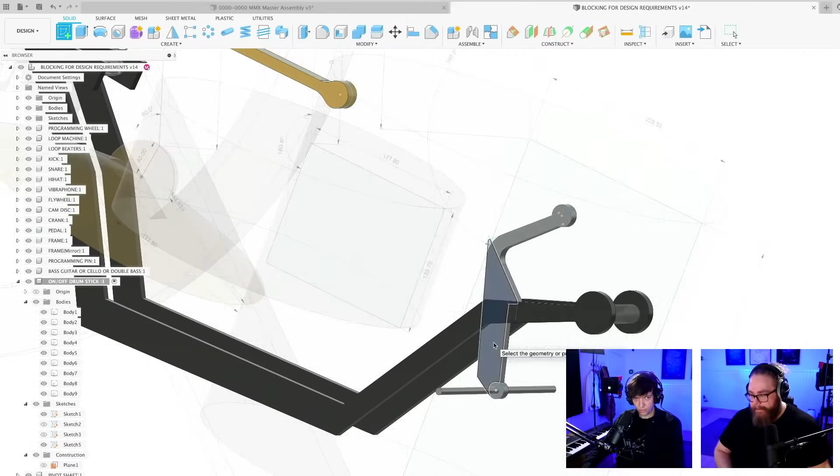Welcome everyone, straight into the fighting is ongoing here at round 3 with the Marble Machine 3.

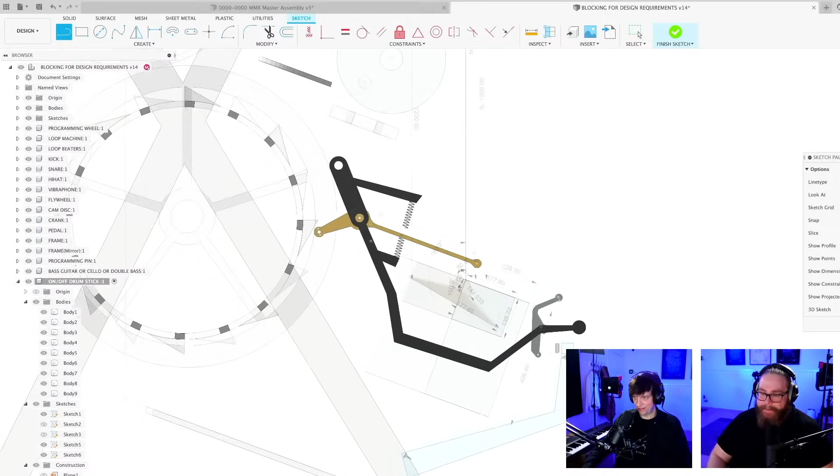Oh, this is going to be the ugliest ever. I'm just gonna connect this point here. You get what I mean. So the idea is with digital design, it's free to fail, and then we can think about stuff like, for example, changing the programming wheel entirely.

So this whole part is just now holding this spring. It's super ugly, but this is what we're all about today.

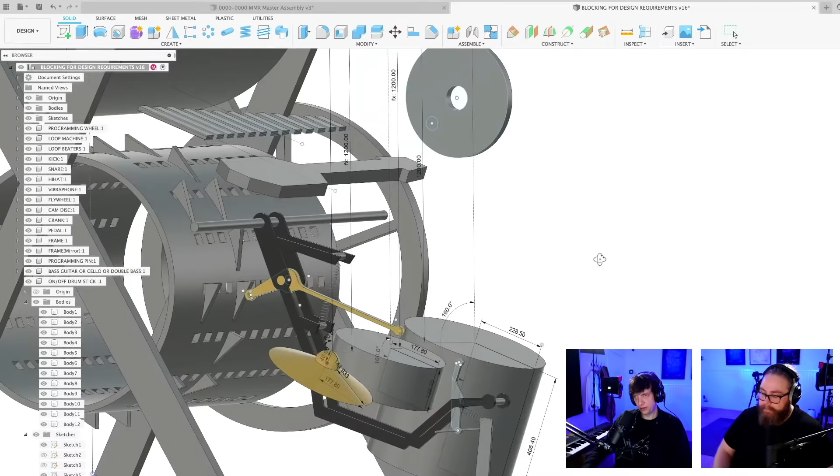So let's just put it up here. Create sketch on the middle plane.

So the cool thing with this blocking is, oh yeah, I need a spring, which then tells me, oh yeah, I need something to secure the spring to. Actually, let me change this. And it doesn't matter how ugly it is, I'm going to make it neat later.

There we go. Beautiful, there we go. Let's actually... this should be longer. Let's just do this. To the knee, to the knee.

So what do people think? Do they think a lot of people are missing the Marble Machine X? Of course, I guess. Some people wanted to see it finished, but I think a lot in the audience also understand the decision that if you're gonna sink a lot of more years to make one song kind of work on it, then there's no world tour. That machine can't come out of the studio.

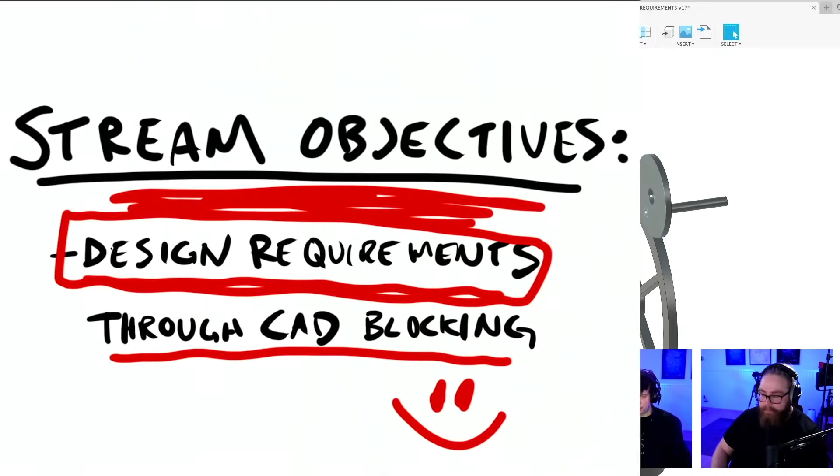So actually, if we go over to the stream objective screen, here's the stream objectives. We're still on the design requirements through CAD blocking right here. I want to make a fun thing, a list of the MMX design requirements omitted, which means this is a list where I can show you all the crazy design requirements that we had on MMX that made that project more or less impossible.

So what you just reminded me of: modular design, to be disassemblable. That sounds very, very bad. So the new machine is not modular. It's going to be in one piece. It's just going to be constructed in a room that can hold the whole machine.

Oh, sorry. I didn't mean to play that, but it was always nice with some encouraging words.

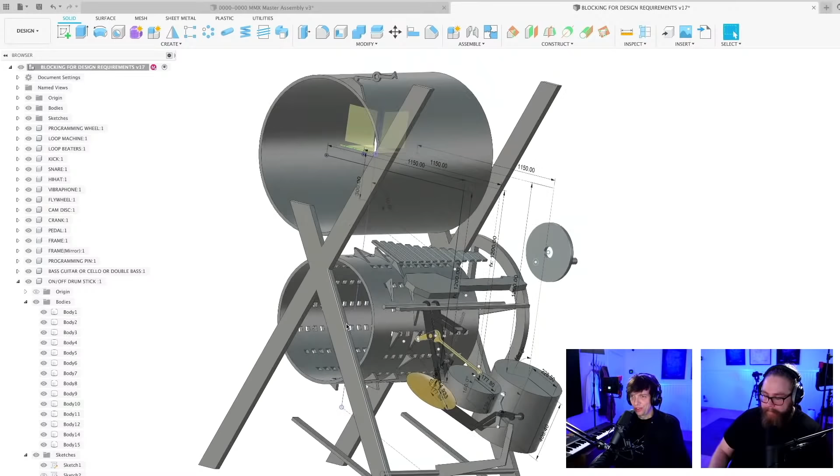So for example, this frame, it's going to be built in one big piece, so I don't have to make five sections where audio cables have to go into each other. So much simpler, things like that, crazy. And this is what Elon Musk was talking about in the last video I posted: try to make your design requirements less dumb.

I won't be able to do an airship on this machine, but I will be able to make copies. So I will send a machine to each continent of the world on the world tour, and then just go on boat and wait a little bit. So less dumb design requirements.

And here we have from Hex Lattice: I still believe, I look forward to that world tour. You see, people are with us, Martin. That's absolutely wonderful, thank you. And from Scholar Andrew: it's so good to see you again, Martin, I hope you're taking care of yourself. Thank you so much, and likewise, it's so fun to be back.

We have set up this whole operation in an effort to produce the best results we can ever produce while keeping ourselves as sharp as we can. It's crazy how much more focused I am on the process compared to before.

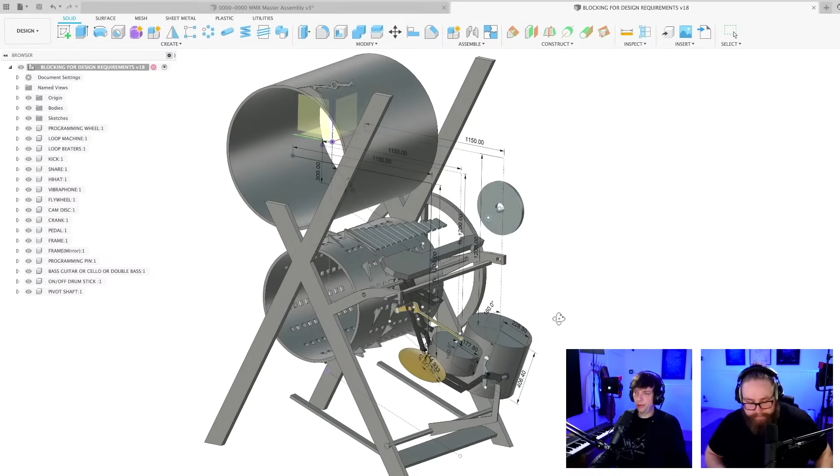So this is not going to be the main CAD model, this is just for sketching it out. Blocking, right? This is blocking, exactly. And I'm going to start everything from scratch once we have the list of stuff.

So now, if you picture this spring pulling this whole black thing up, it means that when I push this lever, I should actually hide the sketches here. So when this lever is pushed to the left, this little latch over here will release, and the whole black thing... I can't really move it nicely. That was stupid, I should have put that in its own component. It will pivot up, I can show you what I mean. It will pivot on this point like this, but it won't pull everything with it.

Maybe I actually should just, you know what, I'm gonna take away all the parts that should not move with this. I'm gonna create components from them. It's gonna be a little messy, but it's better. That's why we're here. Make a huge mess - all these things are stationary. We're actually here to fix the mess that you created. No, absolutely. Create components from bodies.

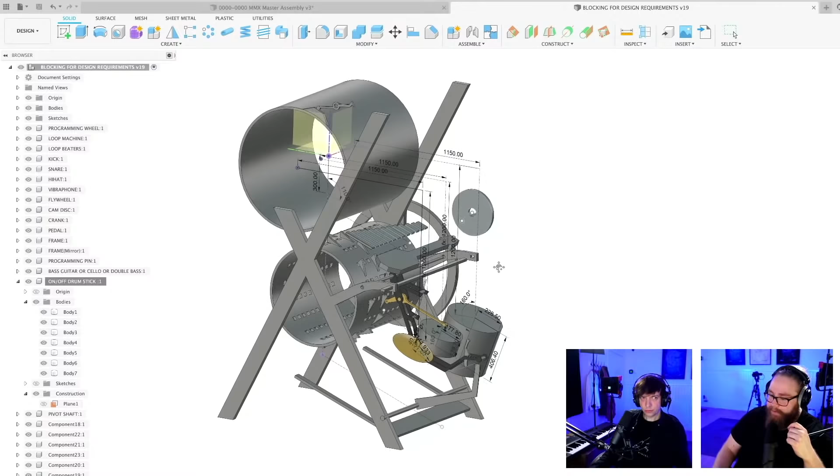Tim Schafer wondered - the comment just went straight away from me. Oh no, you'll find it. If you just give me - would you consider reusing designs that worked from MMX because it's a known good solution? I would be afraid to change the whole design and realize that it would not work in real life. So that's a very, very good point, and it's something that I've learned a lot from.

If you once have prototyped something and it actually works, that's kind of super valuable information.

I agree fully with your idea to reuse things that have proved to work, for example the gear ratio from the crank to the programming wheel, 1 to 64, all those things. But I don't want it to be a continuous tricky balance to find between reusing stuff that worked versus having a clean slate to be completely free in the new design process. But we should definitely think about it.

Just a quick one here from Bamahut: Welcome back, Martin. I was worried you gave up after your last video a few months ago. Good to see you back at work with more focus.

Oh yes, it's good if we give that impression today that we have more focus. That's exactly what we want to do. Woo! Let's go. What should we add now?

So we've been in a discussion about the bass guitar. Oh, we have the cello image. No, do you have it? Not yet, you can look for it.

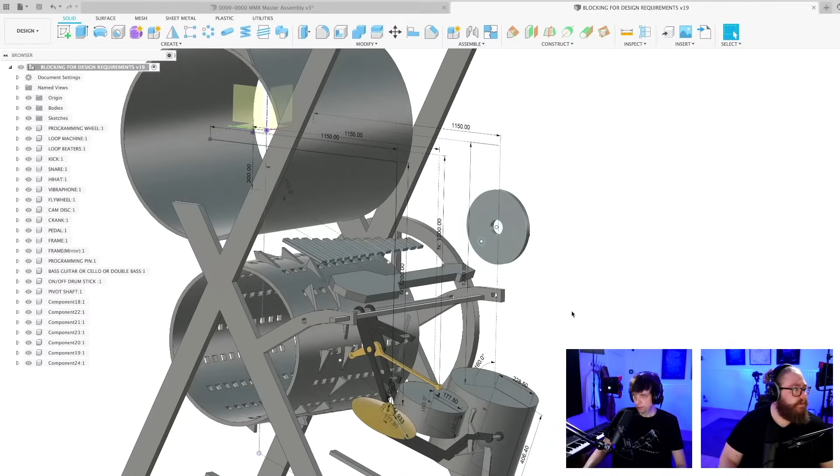So, marble drops. The thing I know for sure is going to be marble played is the vibraphone. Let's just move these a little bit outside.

Wait, on this sketch I can show dimension. I don't have to go into the sketch, I can just go into this value here. Let's do 130, and the vibraphone goes out a little bit.

So I've been promising to give up on my darlings. Another design requirement that I will omit: that made everything... instruments have to move when being hit, like the fact that we wanted all the instruments to pivot, like in the animated Animusic Pipe Dreams video. Another design requirement that is wonderful, but that made everything...

Oh, I didn't want to play it again. Sorry.

So I think I'm gonna keep the instrument still and just make it so much easier, so these drums are not moving around. Instead, the mechanical machine doesn't have to hit a moving target. I'm crying inside admitting it to myself, and I'm also laughing because I know this trade-off is going to help so much in the end.

So, Rosero's 3D printed prototype of the clock escapement wheel. Oh, can we show that one, Hannes? From YouTube? He got it completely right.

So I'm just going to do exactly what Rosero did. I actually have in my studio a sign that says 'What would Rosero do?' It's right in front of me. We don't have the camera angle, we'll have to get one for that later. But he got it completely right.

So for marble gates, I'm just going to do exactly what Rosero did, put a marble gate in here. I actually did a redesign of Rosero's gate, and I suffered for it. He prototyped it, like the comment said before, so you know when something is working. We knew the Rosero gate was working perfectly, and still I iterated on top of it, and my iterations inserted a lot of issues. So I'm not gonna do that, I'm just gonna do exactly what Rosero did.

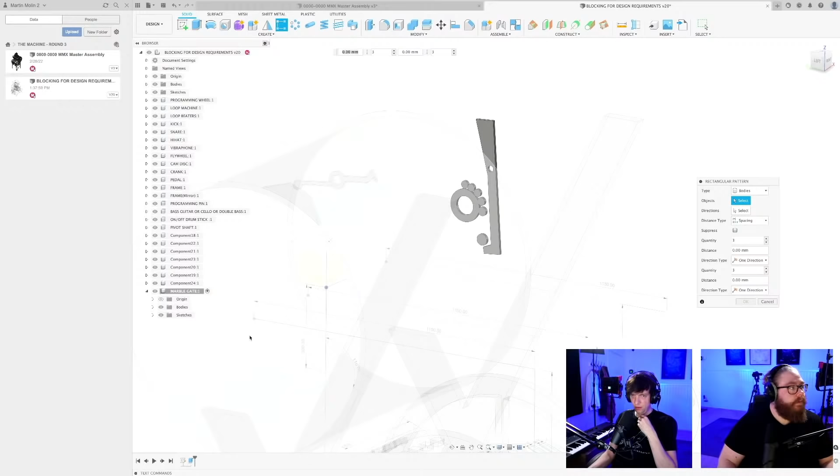So let's just do a rectangular pattern. I've been complaining about rectangular patterns in Fusion, but that's on the sketch side, so in sketches I try to avoid them whenever possible. But out here, when you're not in sketch mode, I'm not scared of using a rectangular pattern, and I'm gonna make the pattern on the bodies. Let's see what's there. Like this, we have 4 bodies here. Oh yeah, never mind.

Along the x-axis, and I hope I can have more channels, so that's something we're going to find out here. Maybe I can have 20 vibraphone notes or something. Say they are 10 apart. No, of course not. 50. Symmetric. Let's just do this for now. Boom.

As I mentioned in the last stream, I'm going to change the diameter of the marbles, the balls, to be much larger so they're more visible, and change material to hard rubber or wood, which makes a better sound on the vibraphone. So design requirements: we have marble gates, wooden or hard rubber balls for vibraphone sound, but they need to be heavy.

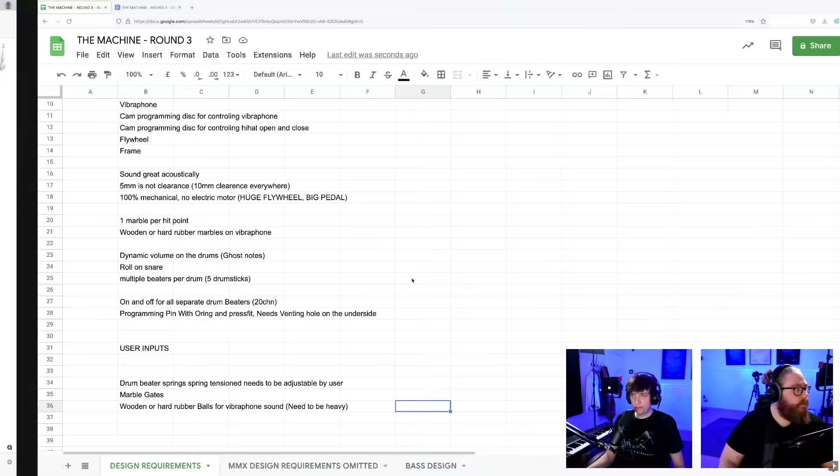Oh yeah, we need a marble lifting system. Things like that, marble lifting. I think that's where I went very wrong with the previous design. On the Marble Machine X here, I had a million ways to lift the marbles. If you see to the left, you can see the original lift. I had only one lift on the first machine, and that's kind of what I want to do on the Marble Machine X. No playing around with lifting the marbles, just lift them. Like 100% engineering, easiest solution possible. I don't know how yet.

I was also thinking that maybe we don't need a funnel for every... oh, we need a funnel. So we need a funnel system. But I'm thinking maybe we can just have one big funnel for all the marbles. Something like that.

Now when I look at this, I'm thinking maybe the drums should be moved inwards. We had a nice comment earlier about putting the drums on the side. So if the drums are completely underneath, maybe I should just put a vibraphone outwards. Let's try that. So that's on this one.

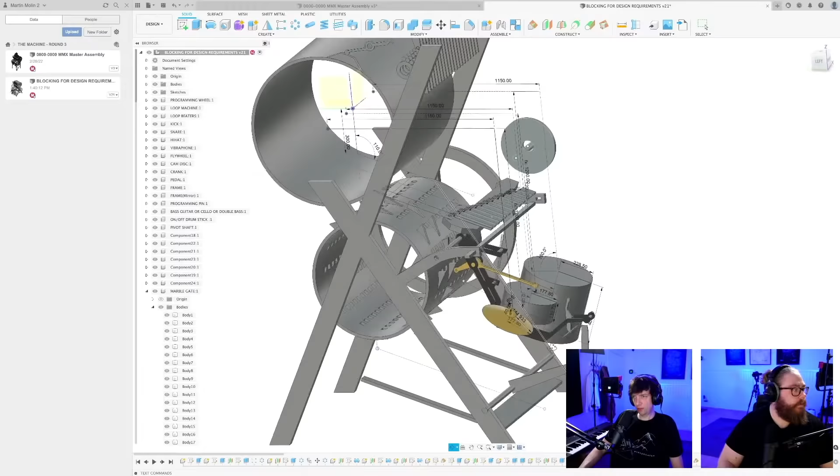Oh, that looks better. Maybe the marbles can jump from the vibraphone over all the drums and then be caught somewhere. Maybe the marbles from the drums as well can...

I put the vibraphone here. I have to plan for the resonator pipes. So let's add them to the list. Resonators.

Yep, so this is the clock escapement gate, prototyped by Rosero, with inspiration from Gonzonator. Yeah, just show the first clip again. This is just what we're going to do, and I broke the escapement thing because I thought it would look cooler. So talking about my last video was another thing like that, but that's just what we're gonna do, and they are represented up here on the screen. So yeah, that is going to be awesome. Woo! Thank you. Thanks, Jamie.

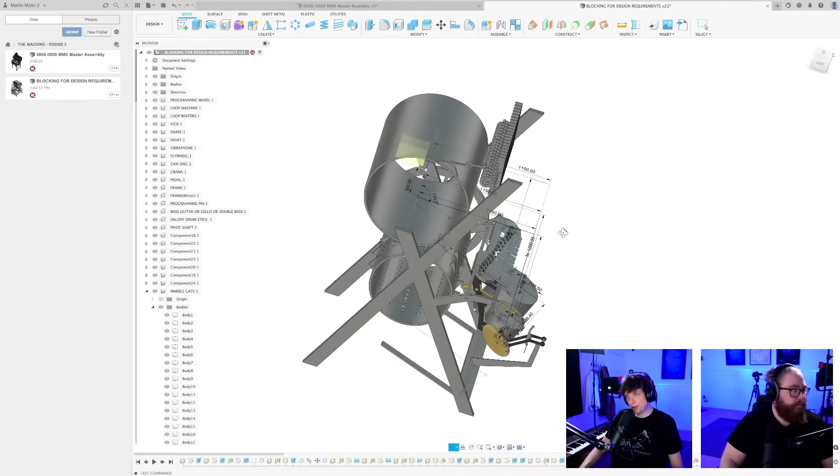So there is this square system where you have known knowns, known unknowns, unknown knowns, and unknown unknowns. And the known unknown is the whole bass placement. I can't really get it in. This is something that I need to think of pretty fast.

What if... maybe just on top? Maybe that would look cool. So if I just move the bass on top. Oh, wrong sketch. This sketch, please. 200. Is that working? Yeah, that is working.

Maybe the vibraphone is too close to the drums. That's also bad sound-wise. Acoustically, it would be better to put the vibraphone as far away from the drums as possible. Yeah.

I love the idea that the drums are a little bit in the bottom of the machine. That feels great, like natural: drums, bass, vibraphone. But if I'm going to play the bass with my hand, it can't be in the way for the marbles that are falling. Maybe I should just skip having a bass.

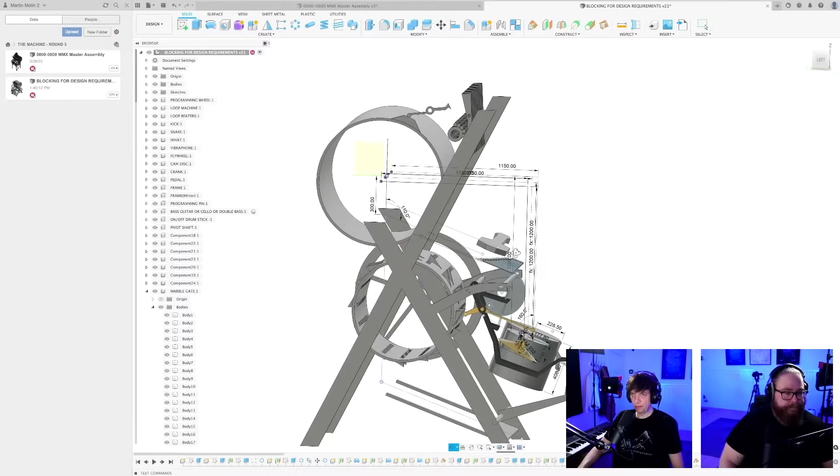No, what are you talking about, sir? You want some bass, sir? Yes. I think me too.

I'm gonna move it back a little bit. I think I have a transparent cello for you now, at least. Awesome. I'm just going to fix this, and then I'm going to try to add a cello into this design. I'm just gonna see if I can constrain this. 700. Ooh.

Okay, so I'm going to go to the screen. Where is the... in our stream folder, you'll find a new folder for you right there. Let's see, insert... Let me know if I need to get over there, because I can switch to this camera, you know? Oh, that's nice. I will come and find it with you. That's nice.

Insert. So here. Yes, here. Here. Ooh, nice. Face, I'll put it here then. Lovely, there we go. Let's see if something magic happens. It has—check this out.

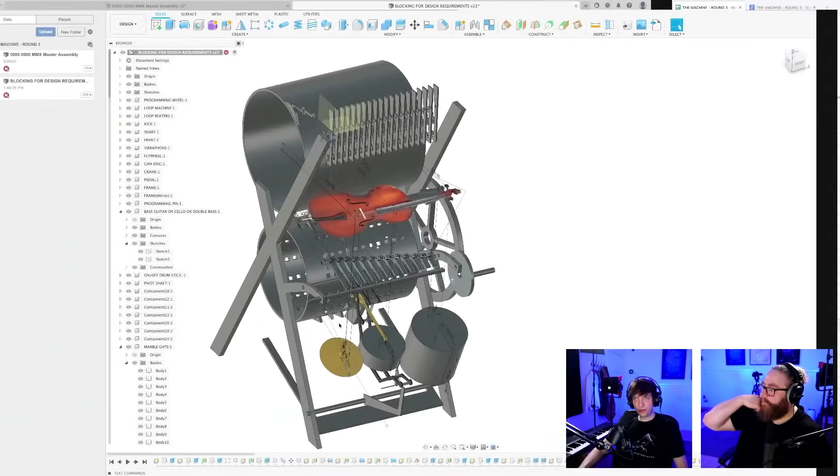And a lot of people are asking if you ever considered a hurdy-gurdy. Well, we had the idea with a solo instrument—I'm gonna put that here in the design requirements, solo instrument. We had it on the phone. I had a hurdy-gurdy version where a spinning disc was vibrating the string, but I gave that up.

This looks fantastic. So, okay yeah, this bass is going to be a headache. Let's, for fun, duplicate these beaters here, because we're gonna have them in many places. Yeah, I vote for fun. Let's go there.

So this, and all of these. Let's make a rectangular pattern of those. Chaos is ensuing quickly here. So let's say I want like 4 for each drum, so 12. I should have actually grouped them, but never mind. 200 and symmetric. 100, here we go.

Are you feeling it? I'm so feeling it. The wheels are too small, though. That's the wheels turning in your head, at least. Yes, they are, they are. Okay.

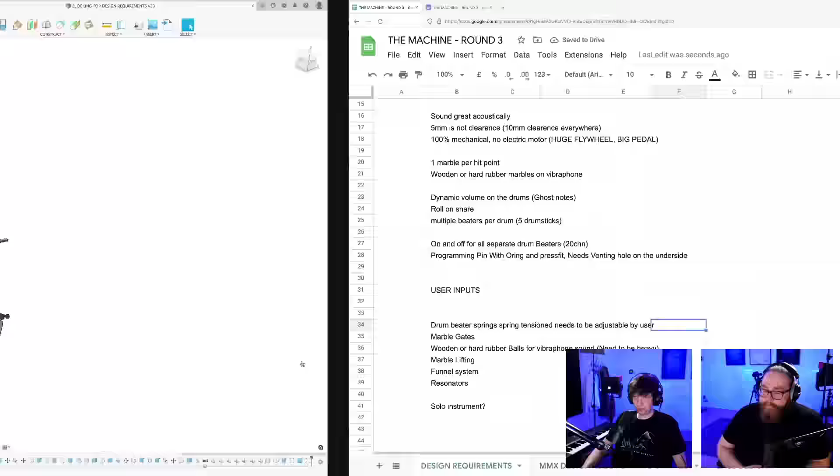Pascal asks: why not use drumsticks to hit the bass strings instead of marbles? That's a good point, I've been thinking. What activates the bass strings? Like plectrums, beaters, marbles, pull-on, hammer-on... Rhymobile, Jan Cardell style—Jan Cardell, my favorite Swedish artist, built a bass guitar where electromagnets just pulled down on the string, and then you get the note pitch and the activation of the string at the same time. Then you don't even need a beater to activate the string.

So yeah, this is so—my idea with the current placement of the cello/bass is that I can sneak my left arm in here, under where the marbles are dropping. So let's actually—what if you move the vibraphone over the bass? Yeah, that was what we had first. Oh, bass directly under the vibraphone. But there's going to be the resonator pipes.

So maybe in 3 levels. Why did you want me to move the vibraphone? If it was with hammers on the bass, then if you move the vibraphone up, you won't have the nuisance of keeping away from the marble drops on the vibraphone when you stick your hand in. No obstruction of marble waterfalls. Exactly.

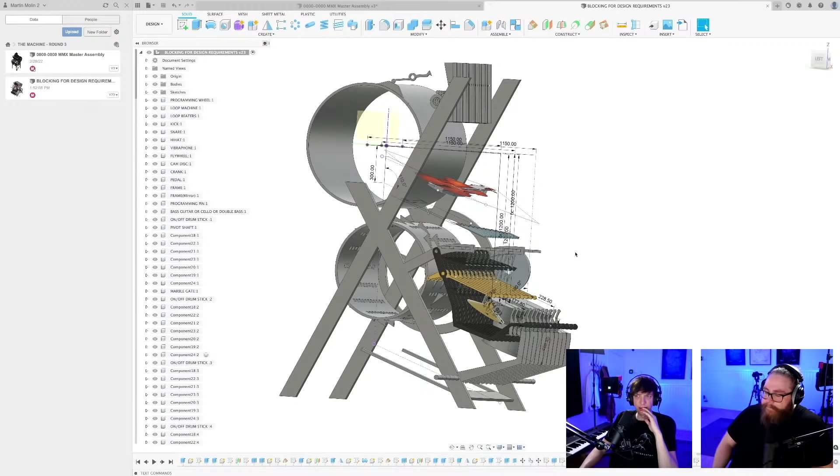Because it does feel a little bit like drums in the bass and then melody on top, right? Yeah, there's something there, but then we don't have a long fall distance for the marbles. But why do we care about that? We don't care about that. Then it's easier to film the letting go and the hit, and maybe the hits are even more precise. But if we're also going to play the drums with marbles, we have a longer time... because up here doesn't make sense.

Should we go back to that then? So because all of these don't have to be here, I could actually—okay, let's try that. Let's put the vibraphone super high, and let's move the bass down to the second level on this sketch. 500 maybe. And let's just push it forward, because here is forward. 100, 1010.

This kind of makes sense, Hannes. I have some logical upgrades as well, not only my physical body now. It was fun having you in the iPad though. Yeah, South Park style—but being on the iPad, you can't do stuff like this, you know?

If I go here and go to this one, I can actually reach out to you and do a cheers over here so that we hydrate. Commando Central. And for those wondering about my chair here—this is an original Martin Molin fixer-upper. He fixed it for me with an audio cable. Who would have known?

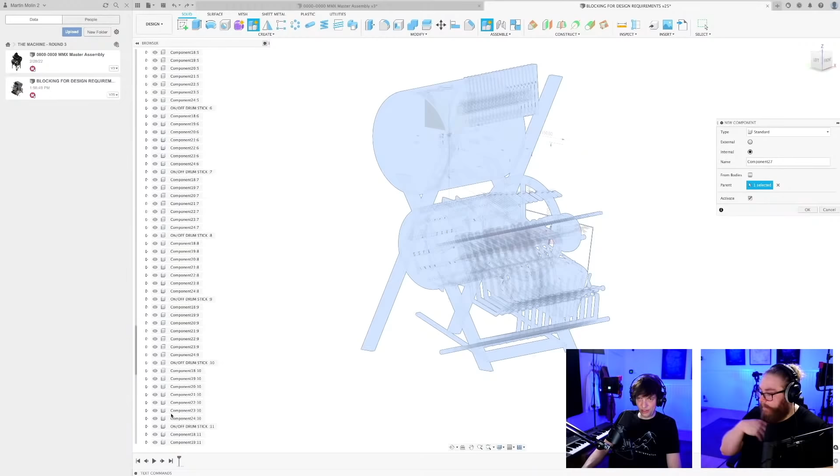Oh, my browser tree has gotten too big. Okay. So let's just draw it on the middle plane. Dropping like this. Oh, I should just make one line and then I can turn that into a pipe. People will like that.

We are going to simulate all this with real physics simulations using the Algoryx software, on the computer that Linus Tech helped build. Since a lot of people in the chat are wondering where that computer is, it will be part of the process further down the road when simulation starts to happen. It's actually right here, acting as a keyboard stand right now. We already have it in-house.

So let's say this is a marble pipe, and I can create a marble path. And the marbles are... 440, like this, boom. Let's just make it red.

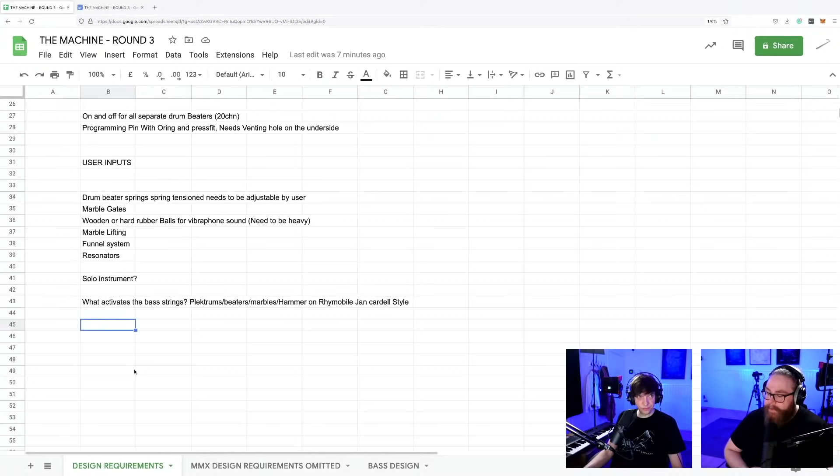If we want the drums to be marble played, that's a big question. Do I already have it down here? Are drums marble played or not? It's going to be much simpler if not, and much more fun if yes. So if I introduce the marble path for the drums too, things are going to get trickier very fast.

Sketch. So then we will see that my window, here comes the marbles that play the drums. So the idea now is for me to discover issues digitally.

Just use the digital angle grinder this time around. Exactly, it's free to fail. Or less expensive to fail.

New body. So there we go. Now you can see that my window is much less, right? Yeah.

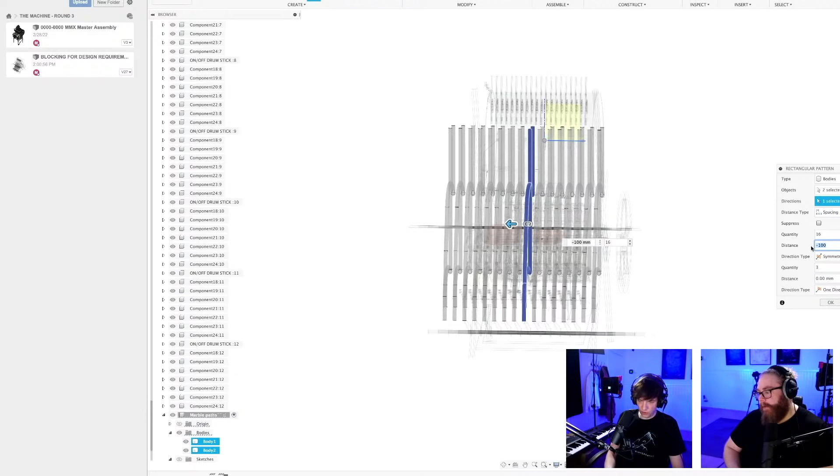So let's just do some more of these. Select rectangular pattern. Say we have 100 millimeters, and we do... 24. Symmetrical. We do 16. We do minus 100.

There we go. Can we get a save file right now? Oh, people are so nice. Look at this, woo! This is what you're going to get if you shoot with long exposure and capture all the marbles - you'll be able to produce this image eventually. I saved, by the way.

So now I have to put my arm in like here. Now we have to move the bass, really move the bass in and under, so my arm action is completely out of the way for all the marbles. We can do that, there's place for that.

Here, 1000, there somewhere. But now we still do not have the resonator pipes from the vibraphone. You know, like on Mad Max Hot Rods, where they put the exhaust pipes up from the engine. I've been thinking of doing a Mad Max Hot Rod resonator pipe for the vibraphone. Yes, please - and that would kind of... no, it won't work either. We're bumping up against some major space issues very fast here.

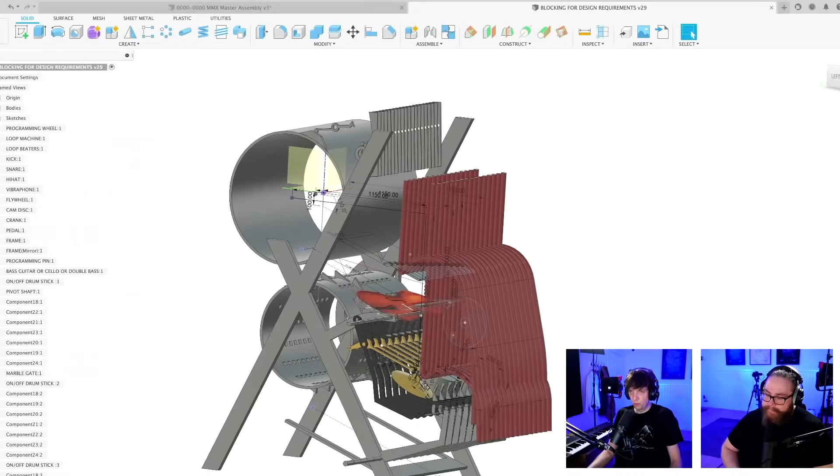In the case of the drums, it's going to be really tricky because all these beaters need to be there, all these mechanics. So for the drums, I think not. And in the end, in the Marble Machine Maker Kit project, we opted out of having them bounce backwards, because it's just a waterfall thing that the marble is bouncing forwards - there's something with that. But if it was possible - so I think on the drums it's not possible, and on the vibraphone...

And here we have something also: SARQF says move drums to the back of the machine, that will open up a lot of space. Yes, we had a similar suggestion earlier, and totally agree. It's a shame, and/or under.

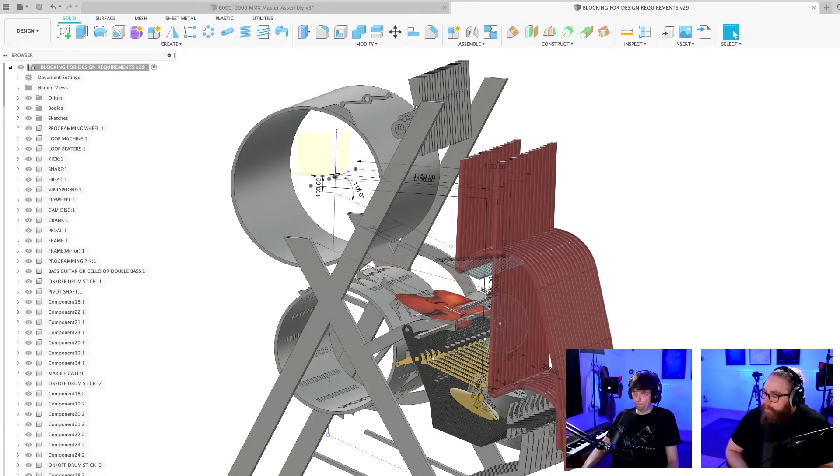Or Amurpus MM suggests: drums sideways, vibraphone inward. Sideways - I guess if we don't want everything crammed right in the front. Sideways is also an alternative, actually. Everything is on marble bouncing backwards.

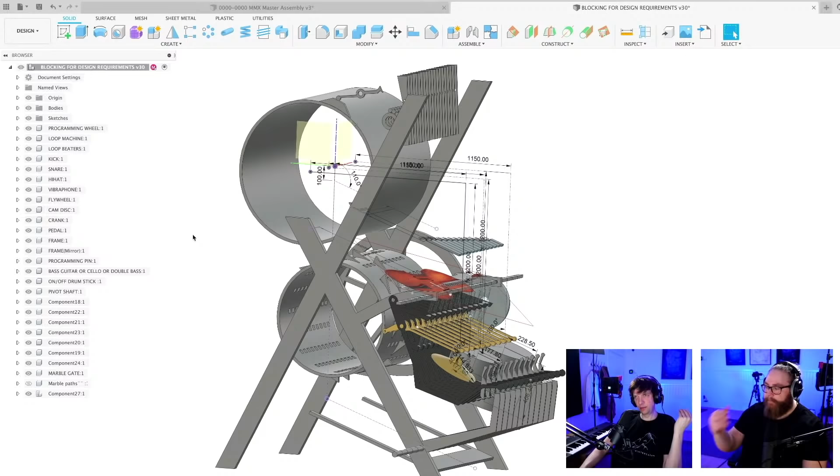If the vibraphone... Alan Barker, have you considered using this space inside the programming drums, perhaps for the bass drum? No, but I have considered that one of the best marble lifting techniques is actually inside the programming drum.

So now that you pointed it out, I'm just going to note that here: marble lifting. Fix the screen - I have to click two buttons, it's way too hard. Marble lifting, inside prog wheel, conveyor belt, question mark, gunk. Inside the programming wheel makes it very difficult because as soon as you have spokes and stuff, you need to hang stuff in there, since the wheel is spinning.

I don't think it's needed, it's just a thing to solve this. Let's add the resonator pipes to the vibraphone, perhaps.

If we put them here, they can go under, in between the two programming wheels. I think the lower programming wheel should sit much lower - the loop machine, let's see. I don't think my model is very parametric. I'm going to move this further down.

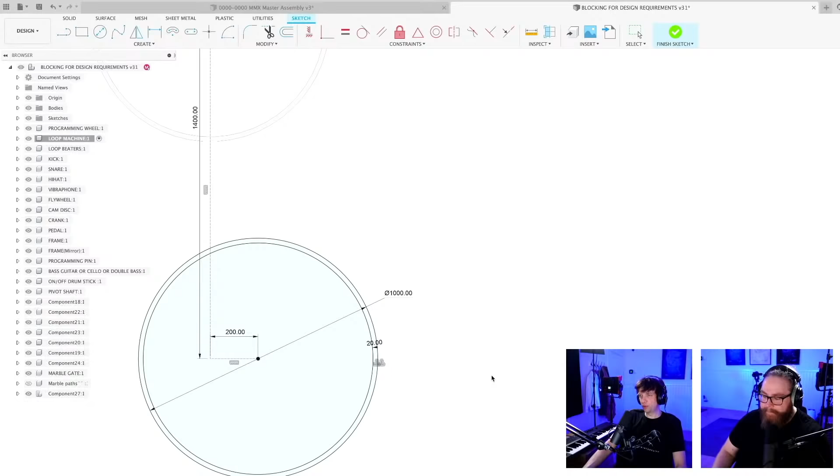Function over form is an even more aggressive approach. Oh, everything followed - look at that, this looks much better already. And the flywheel should follow, and then I'm going to make my blocking a little bit more parametric.

How do I do that? In this sketch, I'm going to project a point from here, and then I'm going to make this flywheel concentric with that circle. Boom - which means that when I move the lower drum, the flywheel component will move with it.

So form follows function, yes. I've created a huge space here for some resonator pipes - you can see how much air there is here. We can even fly through it. Woo! Like this.

So we could have the vibraphone pipe coming out through the two programming wheels. How does that feel? Hannes, 3000 - that feel, yeah.

And we have here a comment - if you could have the drumsticks under the drums, that also gives us more space.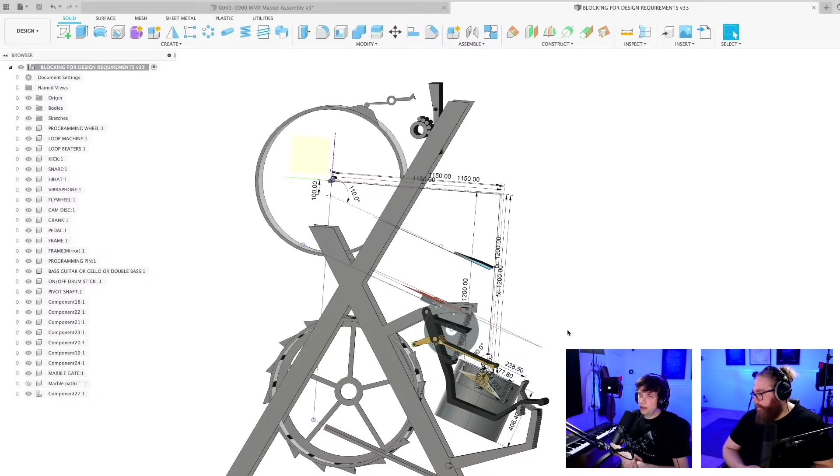I'm a little bit stuck right now on this big decision about the bass guitar. I can make it easier, but if I'm going to use like a cello or a double bass, let's see if I can make it bigger. I would need to either learn how to play in pitch, because these have no frets, or I would need the machine to play the notes for me - so I would need to program the notes. That's a huge design requirement discussion.

Here we go, oh yeah, there. I think we had it already - manual played, or... Okay, I'm not going to give up, I'm going to keep on juggling these positions.

So I think in a way, let's add the resonator pipes to the vibraphone. And let's see, where's the vibraphone? There. Let's push it back a little bit.

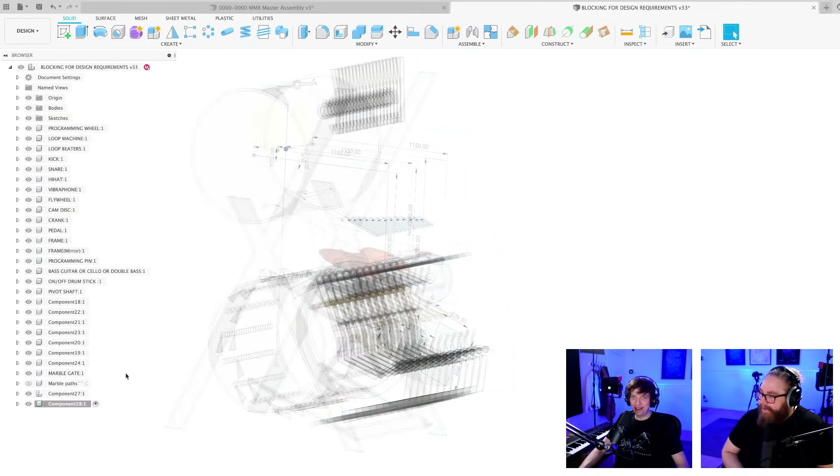Absolutely, which is the perfect cue to let me design the funnel. I'm going to make it the actual size that I'm going to have it, something like this. Wait for it... I did that wrong here. If this is the machine, redefine sketch plane to this.

Like for a musical noob like myself, what is the big difference of having a cello or a double bass? The double bass is just so huge. It's huge, yeah, but that would be a problem, right? Yeah, but it also goes lower down in the register. Which is, I think, a big pro.

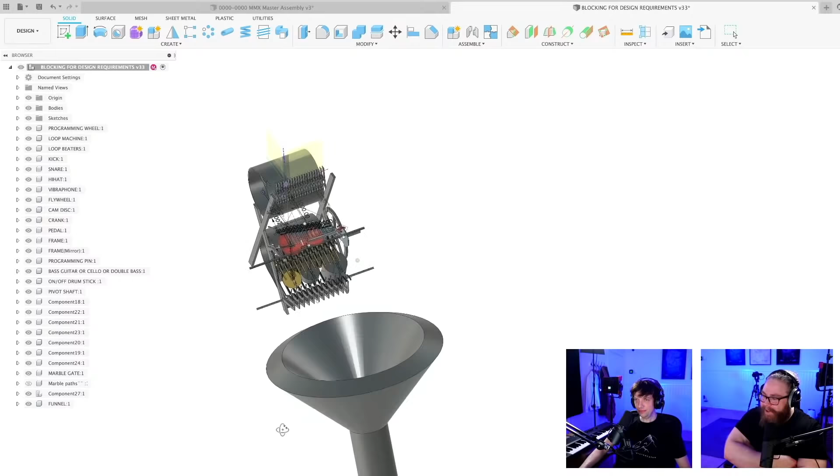So if we just revolve this, this is the actual size of the marble funnel. There we go, the machine should be inside a big funnel, no marbles escaping this time. I've done it with marbles on the floor before. This is making it simpler. So the funnel is actually going to be below the stage. If we just put the stage here, hopefully no marbles will escape, right? Yeah, this should work. I think this is going to be the plan for the funnel.

Chris Lafferty says cellos with frets are 100% a thing. By the way, double bass only goes a fifth lower than cello, and cello can go much higher than a fifth above the double bass. This is wonderful information.

I searched for it. So the cello goes really... can you please fix the screen? Cellos with frets, can you pull that up? Cellos with frets? Only a fifth less low. I love a pizzicato cello, it would be so incredibly cool. I've never seen a cello with frets.

I'm going to make some resonator pipes meanwhile.

Let's do it on this sketch.

Cello with frets is called a bass, that's how I spontaneously would have thought about it. It's maybe like a bass that tries to look like a cello, which of course is cool in its own way.

If you want to look at it, I have some images here, there's stuff available. You can see here you've got some electrical variant of it. I wonder if there's actually frets or just inlays, so it's actually fretless, just visual markings, or if it's actually metal. Something to have nightmares about, or to explore. It was cool.

So I'm just adding this. I'm doing again a little rectangular pattern just to get a feeling of how cramped everything is.

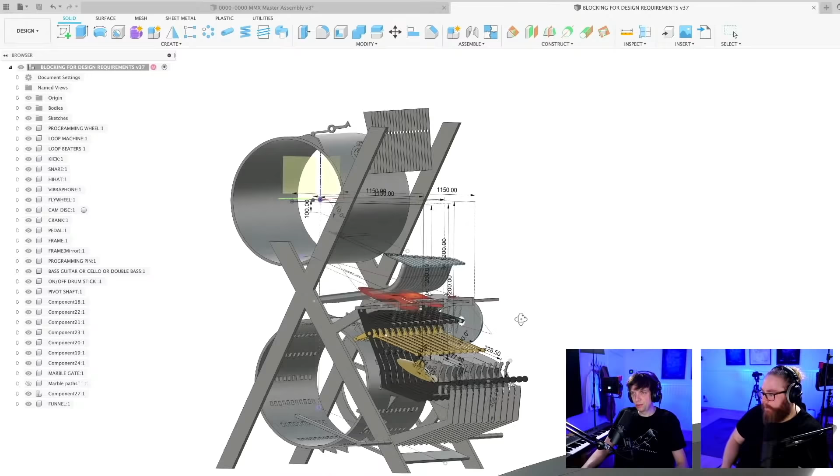So thanks for the knowledge. We can always go back to regular bass. I mean, it sounded great on the MMX, right? Yeah, and if we're gonna do the design principle that it has to sound good acoustically, we have to go crazy, we have to go double bass. Oh yeah, if it needs to sound good in the room, yeah, with no amps. But of course it's going to be super tricky.

The only thing I'm really happy about now is actually the funnel. I think... there we have it, the future is here everyone. 100% engineering, okay? This is awesome.

So maybe should we have a cymbal? Should we have a cymbal? Oh, that's a design requirement if I ever heard one. I mean, a little cymbal. Yeah, we already ran out of space and I'm adding more features. It's feature creep already, you need to add the features to then destroy them. Maybe we should have this sideways. This is the time for dreaming, and then we can chop away all the unnecessary stuff. Well said, well said, there we go.

Cymbal, I'm gonna add a cymbal. I have no place, I run out of space so fast. Is there some way you can hide it, semi inside the machine, like with the first machine, even with Marble Machine X, right? You mean like on the side? Yeah, somewhere, get it inside somewhere, hide it.

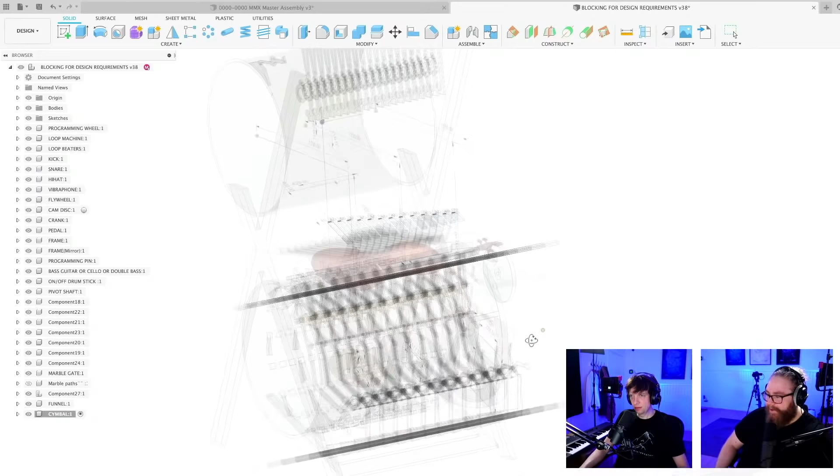Yeah, should be totally possible somehow. Let's just add it and then we can... no, by the way, let's do an offset plane. Oh, never mind, let's do it from there.

Here we go, Christopher Marty. Funnel size seems correct. You'll have the cleanest floor ever with that. Clean Floor Gang is back, right?

Oh, so horrible. It was horrible, everyone. I tried to not be downhearted in the videos. It was horrible, such a distinct sound, and we've heard it for years. Even with the first machine, you could wake up in the middle of the night hearing those marbles falling on the floor. Disheartening, it was so horrible.

Oh, Canal Frump. Place a possible Martin-sized figure in the drawing to plan out ergonomics, arm reach and such. Good idea. Yes, very good idea.

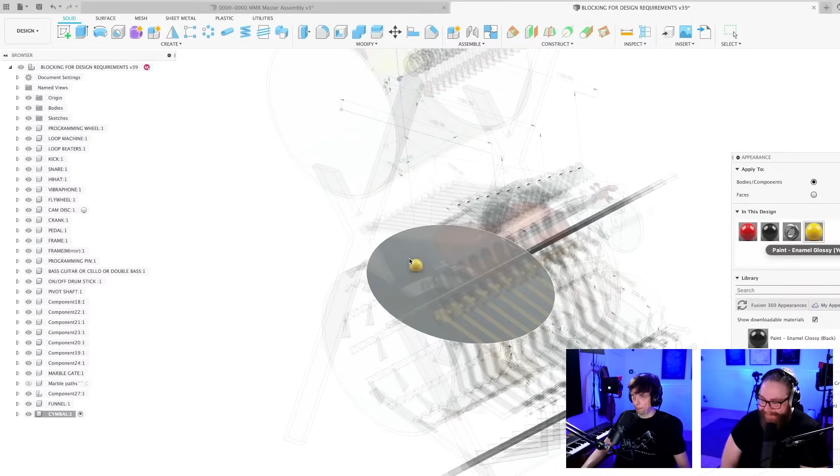Big one. So I'm gonna draw myself. I know my length.

Maybe you have to get the measuring stick and measure my arms, Martin. Do you want me to do that? I can go fetch it. Yeah, why not? I'll be right back.

I will switch you to only you then. Oh wow, so cool. Be right back then. Fantastic.

So we're gonna do here, let's isolate myself. I am 187 high, so let's constrain my own height to 1870 millimeters. And then I want to see the frame, so we're standing on the same floor. Here's the frame, I'm going to project the bottom of the frame and make my feet collinear with the frame.

So here's my legs, maybe the legs are like 1 meter. Legs are 1 meter, and head is tangential to the top here, so head is perfect. Head, I think, should be 30 centimeters.

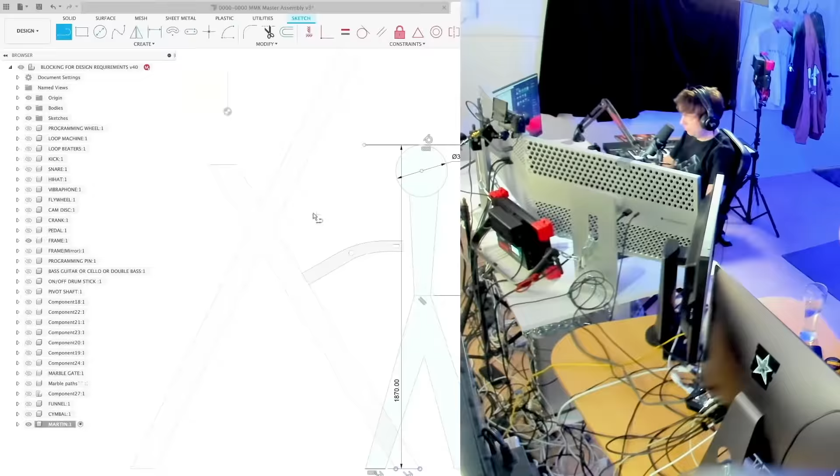So... 940. Are we done with this? Can you measure my leg? I can measure your leg. People definitely need to see this.

I don't know how, this was probably not what I meant. 940, yeah, with the shoes, oh yeah. So I can actually add like 3 centimeters, I'm gonna put 190 then. 108? Yeah, wow, I guessed one, so I was close. 180 for the legs, 940 for the arms.

Now let's measure your confidence, Martin. Oh no, it doesn't reach that far. Look at that dish. It's too big for the yardstick.

Gonna mirror the arms, and I'm gonna mirror this line. Okay, we have Martin in the house. It was a very good idea actually to get a little scale reference.

Unisolate all, there I am. I fit into the funnel, I'm very happy for that. We're gonna move me a little bit closer to the machine. And I have the sketch on a plane, so I can just drag this when I want to stand closer to the machine.

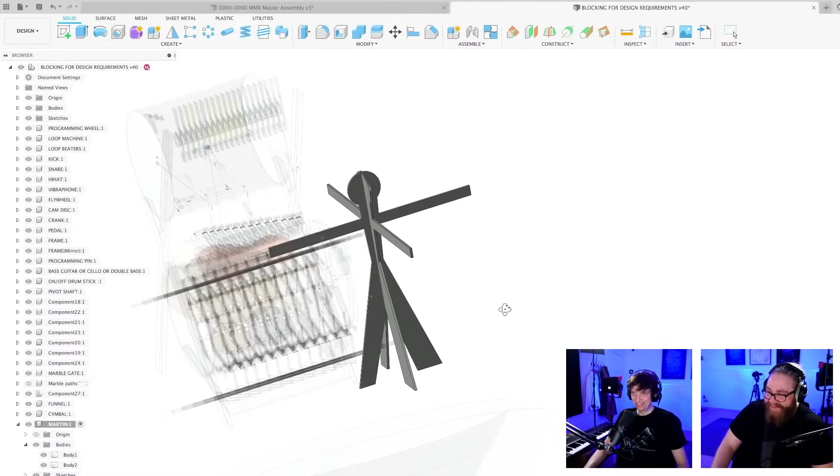Whoa, that looks exactly like you. So you can actually see that. Yeah, this was a wonderful idea from chat. Thank you.

We should make me another color. I'm probably red. So...

Another idea is to just skip the marbles, just have everything played by beaters. One idea is just to skip the marble machine entirely. Yeah, but that's actually the idea for this project.

If we go over to the plan, right, and then you need to fix it. There we go. So just repeating what we said in the first stream, what we're doing here is finishing the digital CAD model. If this CAD is promising, we will manufacture a physical machine. If it's not promising, we're gonna give up on this idea finally.

So we're actually going to figure out how to give up with good conscience. I can't do that yet because I feel I understand so much more now. Yeah.

Scale feels nice. Yeah, I'm stuck on the... I kind of, but maybe the base is cool there. Maybe there's no issues, maybe just lower the base. I'm just gonna keep on moving it around a little bit.

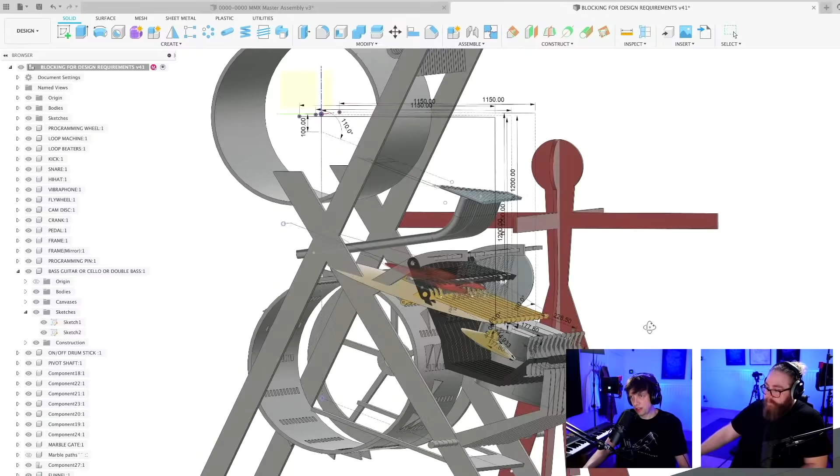I should very soon move all these mechanics away so we can actually see that we have that space for the bass guitar. So now it was great. Now I don't want to play in shoulder height.

I want to play a little bit under my shoulder height, which means this position makes more sense. Can we move it further? Something like this. How cool.

Imagine I'm gonna change the camera to perspective. Look how cool when you film this and you're like bass and drums next to each other, right?

And I don't have to reach down to the left side of the bass. I only have to play up here. So I don't have to reach all the way, as long as there's no scary flywheels in the way for my fingers.

Should move it up a little bit. It's annoying that I can't see. I'm gonna show dimension. There we go. 600. Well, this is the best so far.

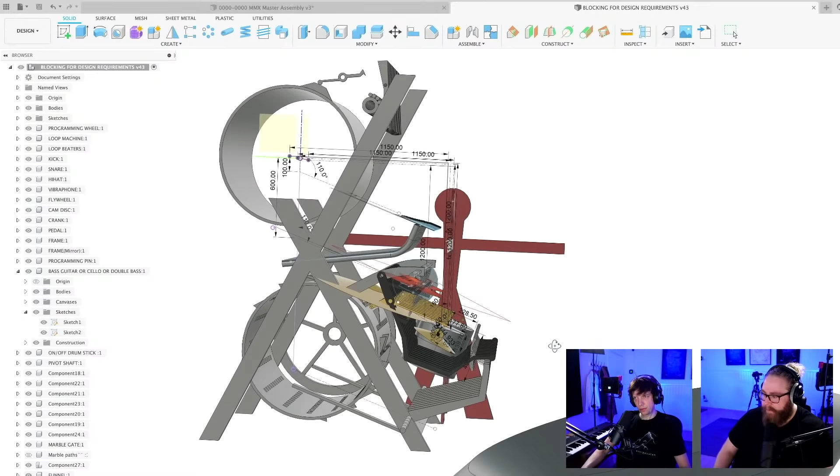Okay, so let's talk about the funnels for real. Finally. So I'm gonna make an ugly funnel.

So I'm thinking about these on and off things. Imagine how good it would be if they sticked out. Oh, I have my left hand, right? Yeah, you do. So all these on and off things, they should maybe just move up.

They should move up here, maybe. Oh yeah, so we could move them, then move everything down. Yeah, because they go out of... Because, okay, I'm going to first draw the funnel.

I'm going to save this funnel. I'm going to call it Funnel alternative 1. It is a nice solution if everything else doesn't work out - the floor funnel.

So let's make a new funnel, alternative 2. I can't even be bothered with correct spelling. Let's do this.

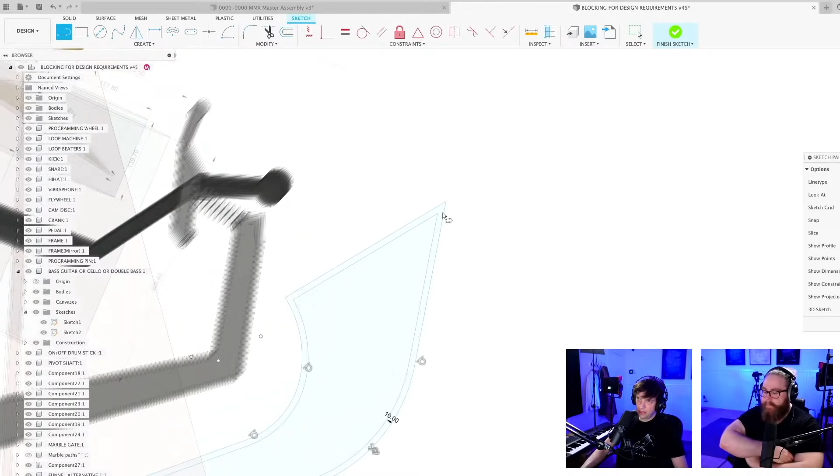No, that's not what I wanted to do. Offset. Like, I'm not going to be aesthetically impressed with this. But everyone will see the practicality.

Yeah, now is not the time for aesthetics. Exactly, art will be automatic. So imagine just having something like this.

And you can even have - I actually have an idea, it has to be silent - you can even hang fabric. I had this idea actually, imagine just rods and fabric. Let's go here: silent mega funnel with fabrics.

Something see-through-y. Yes, good point, I'm gonna add that. I'm on aesthetics, I should keep my mouth shut about that.

Yeah, but like a net, like a mosquito net. Yeah, mosquito net. Mosquito net. And where we have all our mosquitos. Mosquito.

Paul Elnan is wondering here, combining marbles and beaters, how to overcome timing issues in different tempos. It may be wise to have the same operation, same lag on all instruments. Perfect point, absolutely perfect point.

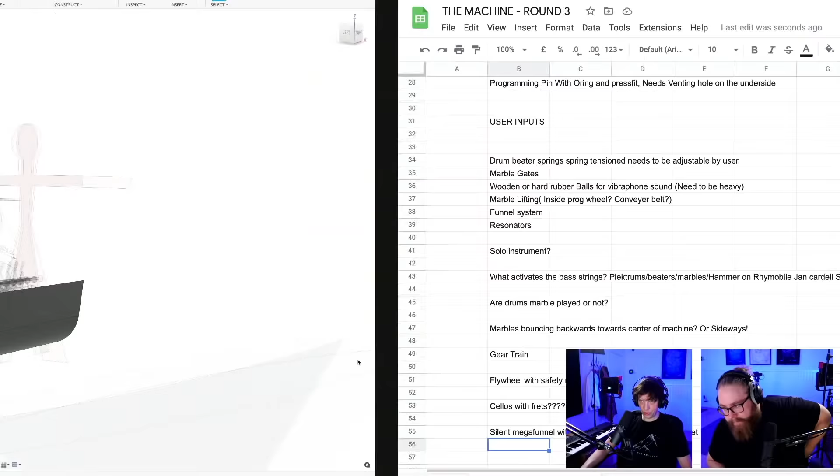Loop machine drums need to be, like we did with the brass thing, adjustable like with the - what's it called - the clutch thingy. That was the correct term, in brass.

So you can very precisely alter the timing clutch - timing, thank you - so you can very precisely alter the thing. And the lag is going to be...

This is also interesting, like if we're going to use marbles both on the drums and the vibraphone, are we then going to have the drum droppers down here? Are they going to drop much higher, fall much further?

I love that screen - the save screen? Yeah. I'm going to hide this funnel alternative for now. Oh okay, it's still the favorite alternative though.

But here's my point: this front funnel now is really fighting for space with this whole interface, and my arms are up here. So how nice it would be if I can move all these levers to be here on top.

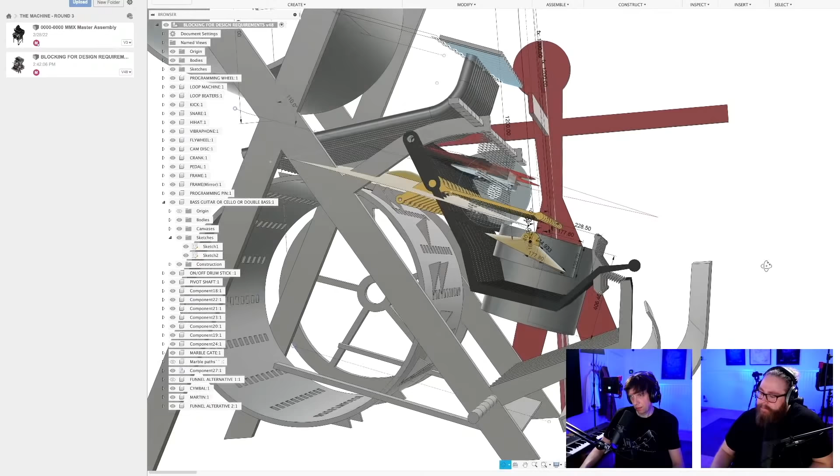But will it work? Never mind that, let's try. Should I move them there?

I don't mind if this machine becomes huge, but it should only become huge if it needs to be. As long as it's modular though, so you can disassemble it easily. No, not modular - it just has to be built in a place with large doors.

What about the world tour qualities of it? We're gonna skip the air freight and go by boat instead. The air freight constraint is 160 centimeters in a cube max, and we're gonna skip that - no part above 160 centimeters. That's not a constraint we have anymore, so that's another one we can add to the omitted constraints.

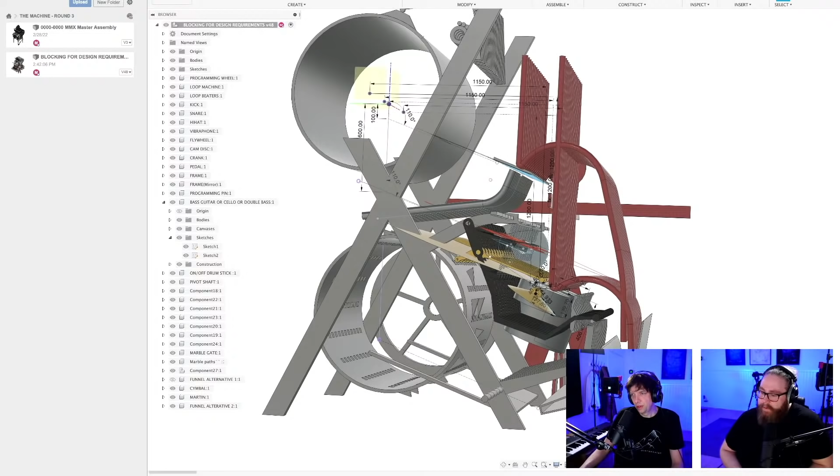Looking at the marble paths again, it would be so nice if we could move this closer, so there's no... oh, and also look at my hands - my hands are going to be in the way for the marbles. So we definitely need to move it.

The on and off switch - I just push them back. I can latch, ooh yes it works! We just saw something click inside Martin's head there. Love it - click. Oh, I thought you meant click inside here. No, in your physical head - we just witnessed a revelation in your mind.

A small little revelation. Let's go back in time to where we were working. Let's roll here somewhere... here... not this one... oh, this one. So instead of having this lever in front, we're gonna move it all up.

We're gonna move it up here. I'm not even going to bother to make this mechanically work right now, I'm just blocking it out. So up here makes so much sense - we don't have to go under and around the drums and stuff. This makes so much sense in so many ways.

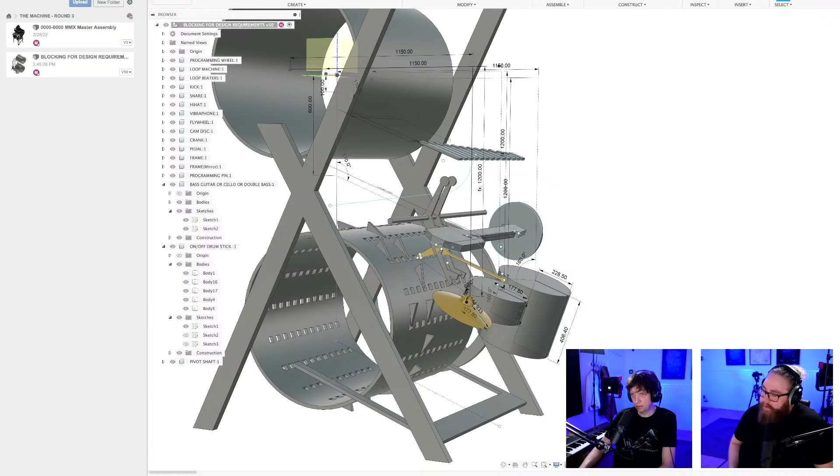Edit this feature - body's missing. I want this body, yes. Look how clean it became in the front now. This is better - now we can just walk the timeline and correct whatever is not working. That thing is still working, these things are okay, so I'm just clicking through.

I actually have a timeline - here's my timeline view, but it doesn't really work. I can show you where we are... ah, never mind. The timeline isn't in this shot, it's strange - here you can see the timeline, it's behind us. Okay, here we have some stuff happening.

So this latch thing - okay, let's start from here. This one is here instead, and this one... can I just move the whole thing? Yes, it's here instead - I'm just moving all the components up to there.

Imagine - again, I know I'm a little repetitive here, but I did this on the physical machine. The thing you're seeing me doing here digitally, I did that on the physical machine after I finished stuff - a lot of afterthoughts. And I mean, this is why - I couldn't have gone straight to this.

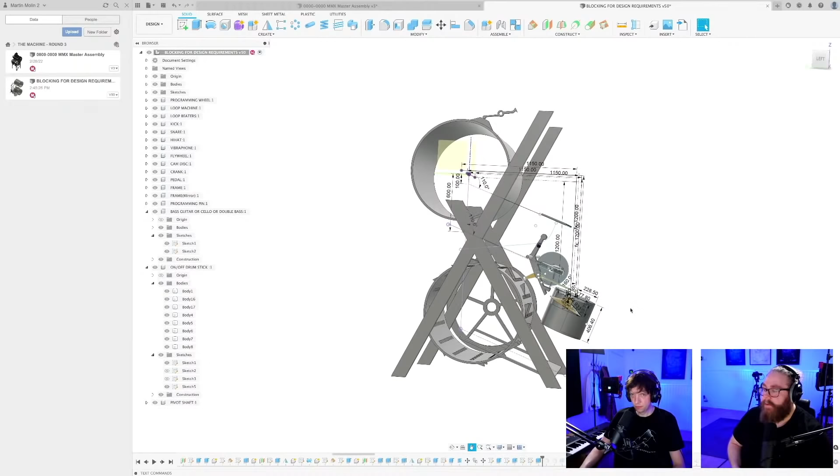I think I'm on the latch component here - sorry, this is super messy now. That's gonna be broken now. You know what, never mind the latch right now - this one does not need to be there. Basically I can just skip that for now. I'm gonna hide it - or actually, I'm gonna delete it. Delete.

Now we've broken our timeline. It's a good sign - enter the multiverse of madness. Some kind of Marvel reference? Yeah, there we go, okay - at least I know now. Yeah, I'm teaching you. Delete.

Okay, the CAD practices are not happy now, but okay, we have all our... okay, the pattern was not happy. Never mind, we have that anyway. That feels better up there, don't you think? Yeah.

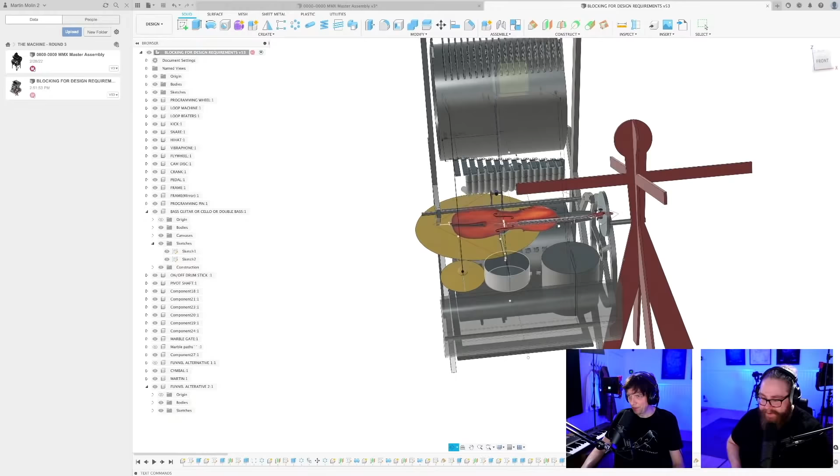Let me move this cymbal and maybe make it a little bit more normal sized. I'm just gonna constrain some stuff here.

It feels so nice to have started on this. Hopefully it's going to be clear. I'm really doing this to prove it in front of myself now. I was very, very, like I said on the first stream, it was hard failing publicly with the first machine, and I wanted to show everyone else. My attitude now has changed completely. I just want to show myself if I can do it or if I can't. And I'm not sure I can do it, but I'm sure I want to find out.

So I'm going to move this cymbal to the other side. Maybe there. So maybe it can stick out like under the base. Funny that the cymbal is going to be the same issue as on the first machine. Just have it on a stand next to the machine with a drumstick in your hand. They do make a worse sound if you hang them on the side. That's just a little bit of a shame.

But it's maybe a little... oh, a normal ride size. If chat wants to Google a small ride cymbal, like is it 18 inch or something? You heard him, chat. So I'm gonna put 18 inch here, which means I put 18 quotation mark divided by 2 because we're using the radius. Oh, then it becomes smaller. 18 is maybe a crash cymbal size.

Well, that looks much more placeable, right? What's wrong with my constraints here? The first measurements are in 20 to 22 inches. 16 inches. Let's see what the consensus will be. Yes, I had 18. 640 millimeters, that's better.

Just trying to constrain this so it doesn't move around so much. 18 is pretty small for a ride. Ambient swelling, you can get an 18 inch dark ride to get a lower tone. But 20, if you can make it work, would be a good option. I'm going to take you up on this. I'm going to zoom in. No, 20, let's go 20. Thank you, from 18 to 22 inches is standard. Okay, yeah, so 20 feels good. And it feels like we can fit that in somewhere.

Let me just repeat this one again so that we can at least have that thing. No, never mind, I know it's there.

It's kind of form follows function right now, with a funnel at least.

Can we get a save? Oh, we should maybe follow the kick drum. Yes, save. And can I get a cheers from you here? Cheers, cheers, my friend. Good idea.

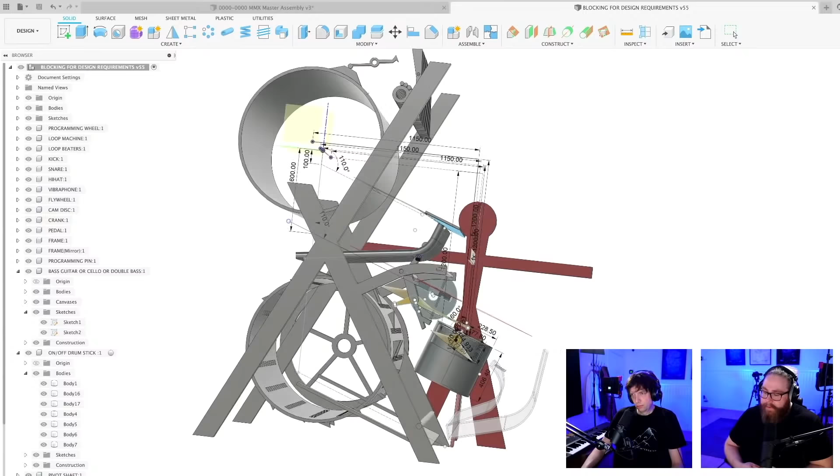Joel Pöllänen says leave room for the cat and dog soundbox. Now we're talking. That's a great idea.

Oh yeah, I think we are. So the top programming wheel feels a little bit... it just doesn't click for me.

Let's maybe look at the marble paths again, because maybe they can look different. Oh, they're missing the funnel. Let's fix that. Here. Look, in the middle of the funnel. And here I can stick my arm in to reach the bass neck.

Looks pretty cool for 3 hours of work. Looks brilliant.

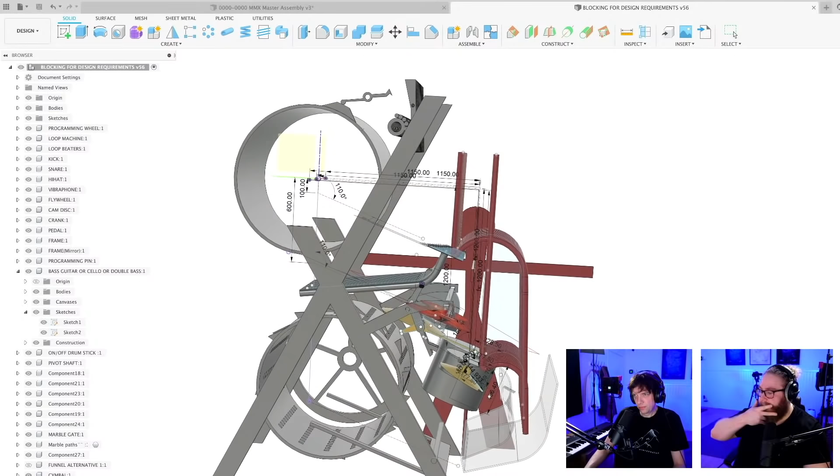So some obvious things right here now. Can we accept the different drop height with the latency? If we're gonna drop, because now the vibraphone and the drums are on different heights, can we accept that? Or should the drums only be played by beaters? That would be sad, right?

Imagine like wooden marbles, I'm gonna go get them. I'm gonna show them to you so you guys will know. Oh wow, do you have them? Oh yeah, you have them in the other room. Yeah, right.

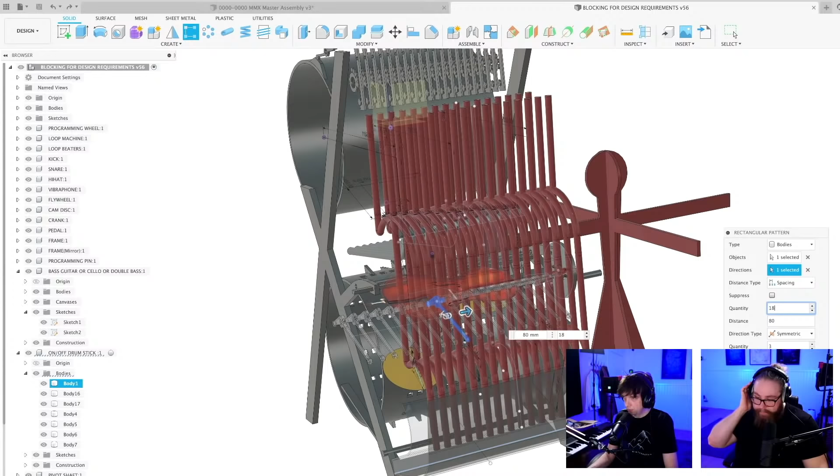So back to the conundrum. I'm actually going to repeat this body to make it more obvious. What view are we in? Oh that's okay. What happened now? Here, this body, rectangular pattern, directions - we're just gonna go this way. Quantity 30, distance 100, 20, 20, 18. So here we get a feeling again with all the beaters.

That's gonna look so cool. Yeah, that's gonna look awesome. Yes, yes, exactly.

But then back to the question, can we drop them, all the marbles, from the same height, or do we have to have the marble drops for the drums further down? And that's just not going to work, is it? It's just not going to work. So if we do this placement with drums on one level and vibraphone on another, either I have to know that we can make it work timing-wise with the offset. But I actually don't think it would work, because you can make it work in one tempo, but as soon as you switch musical tempo, you will have another lag.

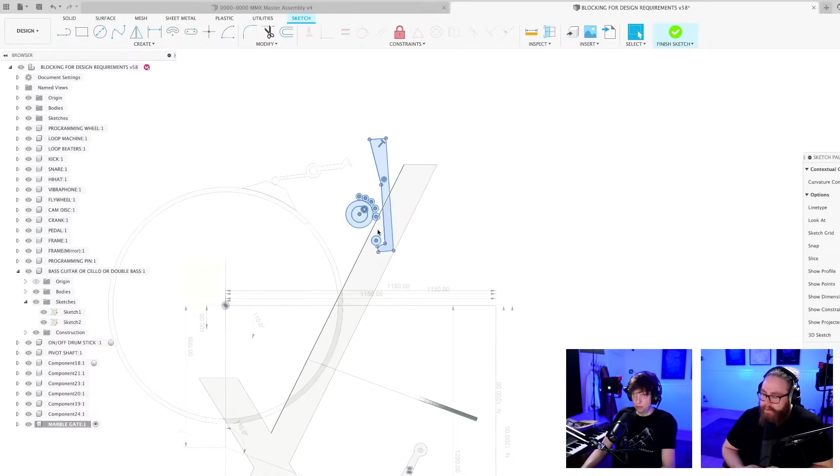But yeah, it's kind of annoying. Maybe I should move these meanwhile - I should move them out on top of the marble path. I'm gonna do this. Move. There. So if they have a longer drop height, they need to be cued earlier.

This is where we try not to change stuff that worked on the first machine.

On the other hand, the loop is going to be the cool thing here. These beaters will be approximately 4 times tighter than the marbles ever were on the Marble Machine X, because this drum will move 4 times faster, which means the timing resolution of these beaters will probably be amazing. So the loop machine will probably play really, really tight, which means the extra marbles on the drums, if they're doing fills and stuff...

I think we just have to drop the marbles from up there. It's not going to look nice to have a lower marble drop.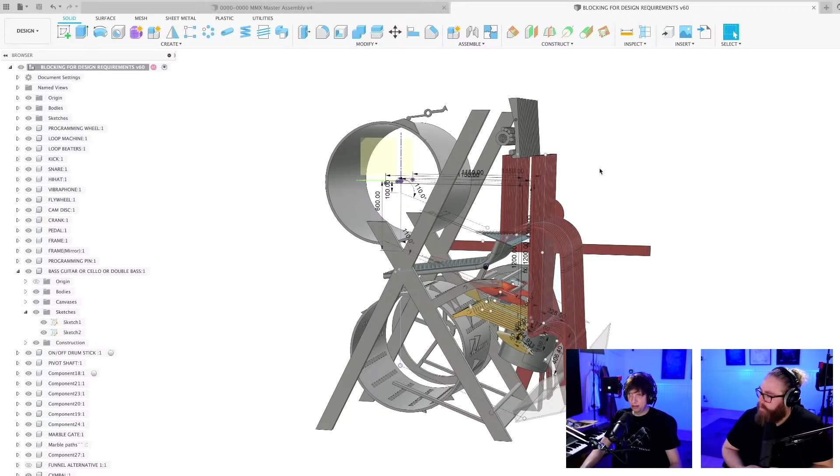If it always took the same... Ooh, could we maybe have the marble released at the same time and then delay the time it takes for marbles by having a little rail? What about that, Hannes 3000? So what I'm talking about is compensating for the longer travel time with a small little... oh yeah, this is it. Here we go.

Because we have to fix the delay after the thing has opened. So if we think of the vibraphone drops here, we just give the marbles a little extra thing to do in the beginning here. Just a little extra thing.

This is straight if gravity has not warped. You never know, though. This could be it. Maybe I should go the other way around. Stupid.

So by giving a tiny... and this is going to be fun like in physics simulations, because we can say exactly what the timing difference will be. So we're giving...

Where's my pipe command? And why are you not working? Are you not tangential? Could that be it? The pipe should follow that new line. Edit feature. Okay, these pipes are sometimes obnoxious. Let's just delete this.

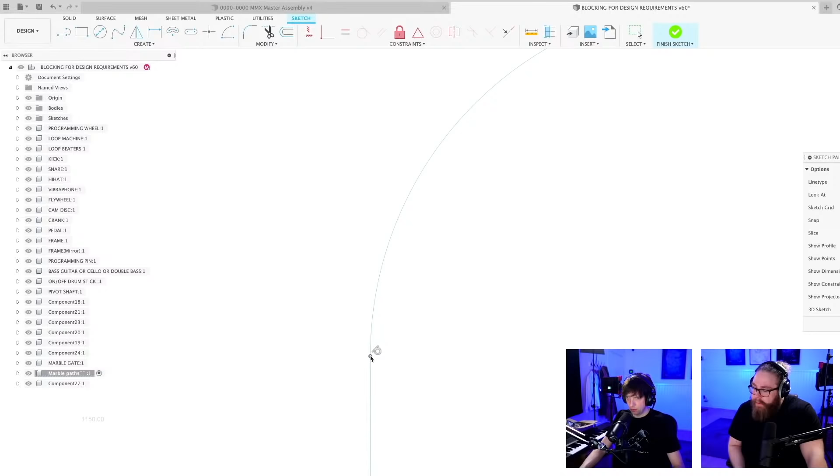So this is annoying, I want the pipe to also take my new little line here. Wait, it could be this easy. Oh, it is tangential. So I'll go here. Some of these commands are... oh, I should just deselect the path.

Okay, there is a problem with the sweep path. Check that it pierces the profile plane. There we go. Sometimes you have to just... look at this, Hannes 3000. Oh wow, there we go.

Just to be clear, the red things we're looking at here, that's marble trajectories, right? That's not parts on the machine. Yeah, so people don't need to worry, those are not parts there.

You know what you actually could do? You could do pattern on path. This is pretty cool, I'm gonna just show. Okay, mini tutorial, mini Fusion 360 tutorial. Pattern on path is a wonderful little command, right here. If you, for example, want a sphere to be repeated along a path for a long time, first you have to create the sphere.

Marble. So let's create it just to make it clear. Where's my sketches? Oh, I'm blind. So create a sphere. Let's see if this works.

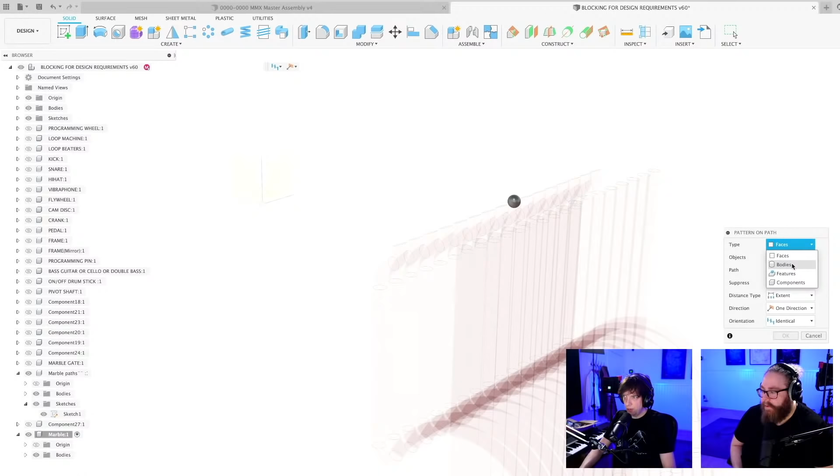So let's say we have a 40 millimeter marble. Not sure this will work, but let's try. Pattern on path, we're gonna pattern this spherical body and we're gonna choose this marble thing. And we're going to say the distance between each is, say, 200, and we want marbles all the way, so like 30.

Distance, spacing for the distance, 200. Boom! This is pretty cool, right? Oh, there we go. So this will be maybe a little bit more clear that it's like marbles in. Yeah, so I love this pattern on path command.

That's a good distance, right? Or should I put them a little further apart? I think that's good, right? Yeah, nice, that's cool, right? Yeah, so we do that.

So that's how you make a pattern on path. For things like this, it's very handy. We should actually do it for the other one. And this is cool now because now we can see how the marbles are like, unisolate, so I'm going to hide this. Oh, this looks more like we know what we're doing. Yeah, more visually easy for people to follow along also.

Yeah, yeah, but where is my funnels? Oh, because I'm back there. Okay, so I'm going to make... I want the other path as well. So let me just copy this. But I don't know if the first marble has to be very precise.

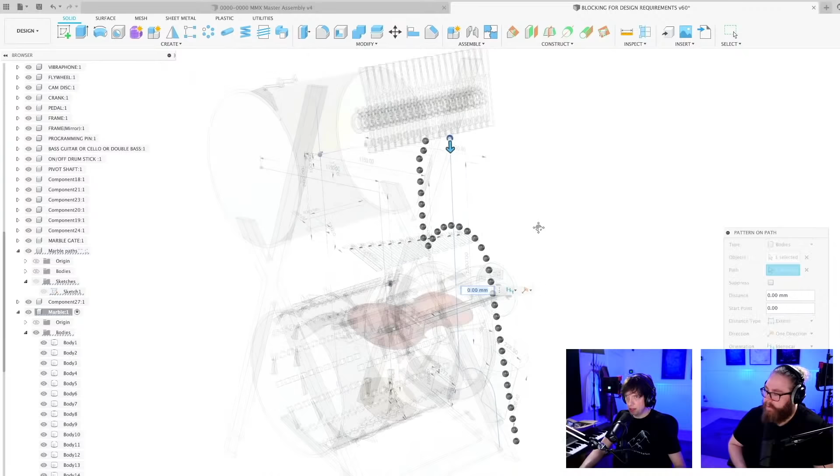Probably not, I'm just putting it somewhere. And then I'm just going to repeat pattern on path. So I'm choosing my object and I'm choosing my path. And then, what distance did we have?

No, I did it wrong. 70 or something, right? Distance type has to be spacing. 70, there we go, there we go. That looks cool.

And then we're gonna just rectangular pattern this. So we have... or maybe I should just leave it like this so we don't have marbles everywhere. As long as they don't reach the floor, I'm happy. I can now hide the marble path sketches. That's pretty nice.

Look how neatly they are falling into the... Oh, this one is on the way out. Uh-oh. This is not too bad. So I have another... No, there was nothing.

My idea is that no drum hit point should be aligned from this perspective with the vibraphone hit point. I'm going to put 3D off, camera orthographic. So if we look from the top, I want the marble hit points, and this is the bottom, and the drum hit points to be zigzag. You know what I mean? No, zigzag.

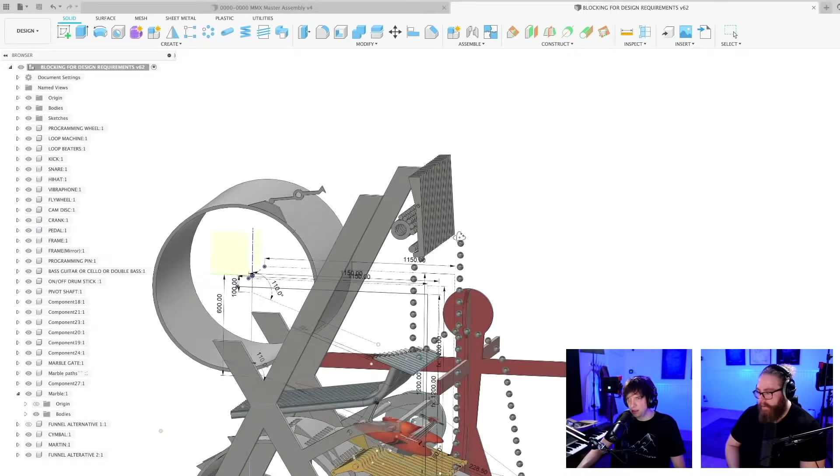The coolest would be if we could have all these on one row. Oh, but maybe we can, because we needed to steer this anyway. Imagine if we could just have all these marble drops on one long row, and then do this extra time thing to get the marbles a little bit back towards the vibraphone.

So these droppers - this line is for both the drums and the vibraphone. You see what I mean? Yeah. So let's move this a little bit forward. Move. So this is a good illustration, Hannes 3000, like that.

Because I felt that it was hopeless, and you just keep on tweaking stuff, and eventually you will start finding stuff. You need to do all the dumb design first to find the solution. So nothing is off the table now. This is trying it out. I would love to have just one row.

So what I mean with zigzag is, if this channel 12 is for the vibraphone, then maybe this is a drum channel, and these are two vibraphone channels, and maybe this is a drum channel. Okay, now I'm with you. So they are never in the same plane along the y-axis, because they're always straight in front of their own programming channel.

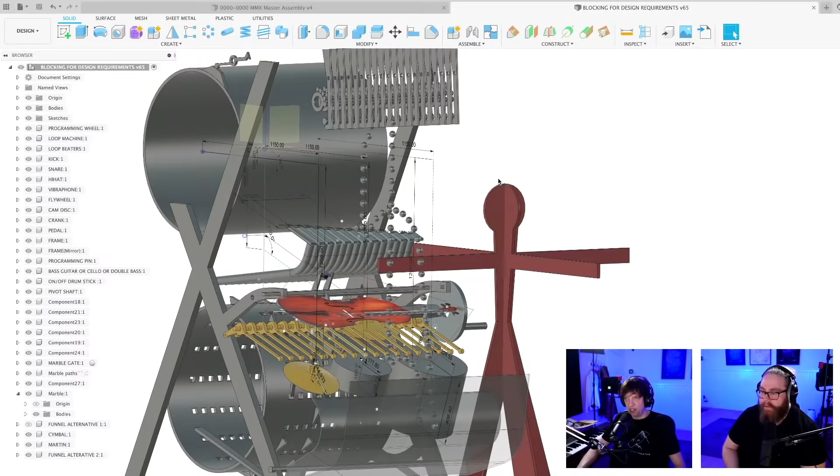Because with this way, I can use the same exact mechanism up here for all the marble drops, regardless if they go to the drums or to the vibraphone. Which leads to the question: should the bass be marble played, or should it be played in some other way? And if it should be marble played, the bass should also be up here. That's my idea.

What do you think? I don't have that much experience with marble machines. I've just been watching them. What's easiest for you, and what do you think is easiest for the functionality of the machine? Which is the easiest solution with all the marbles dropping everywhere? I don't know.

What if this was easy? Yeah, that's a quote from Effortless, by Greg McKeown - the follow-up on Essentialism. Like, how can you do something and make it easy to execute?

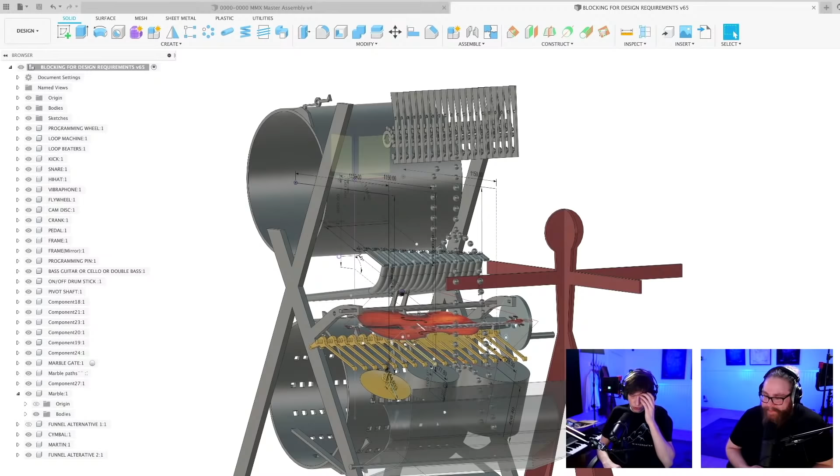I think we will end up stretching it out more than this. Yeah, but not enough to put everything in a long row. Yeah.

Is the bass creating more problems now that it's right in the middle of it all? Like, it was on the side on the previous two machines. Yeah. Even though it never worked flawlessly.

That is a way to go, right? What if, inspired by both of those two concepts, I put a completely new bass placement just for fun - kind of where it was before, but inside the programming wheel? Okay, now we're talking. Because I just saw something inspired by these two concepts.

Where is the canvas? Is it up here? Or is the canvas in... There is a canvas. See if we can edit this. So, boom. It kind of looks nice also, of course. So here, yeah.

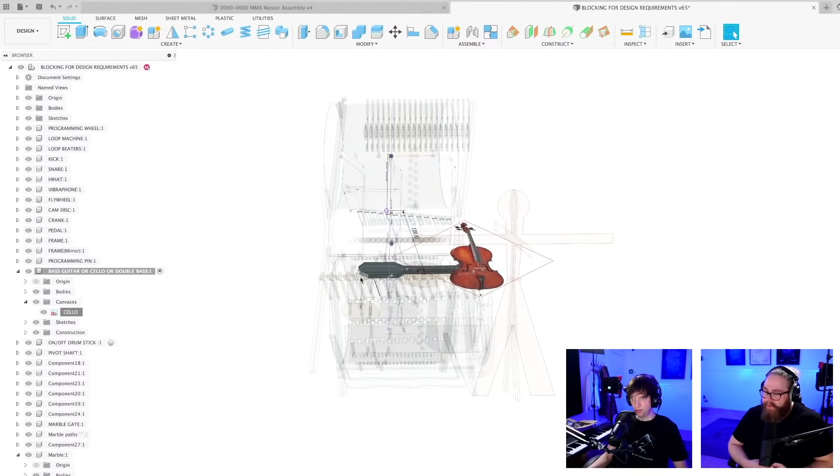I'm just gonna hide this. So, you're absolutely right, because to reach everything in the middle of everything, why start obstructing? We have - the way we're gonna make the wheel, we have a limitation of how broad it can be.

I think it's 1 meter now, and I think it's coming up on the limitation. Of course you can. Because I don't want the base to be outside the whole thing - I know how much pain that causes. So I think actually 110 is a maximum.

Let's just add - what did I do here? Let's add 100. Let's move this thing - I'm moving it in the wrong way now. It's not good, but... Well, maybe. No. Ah. No.

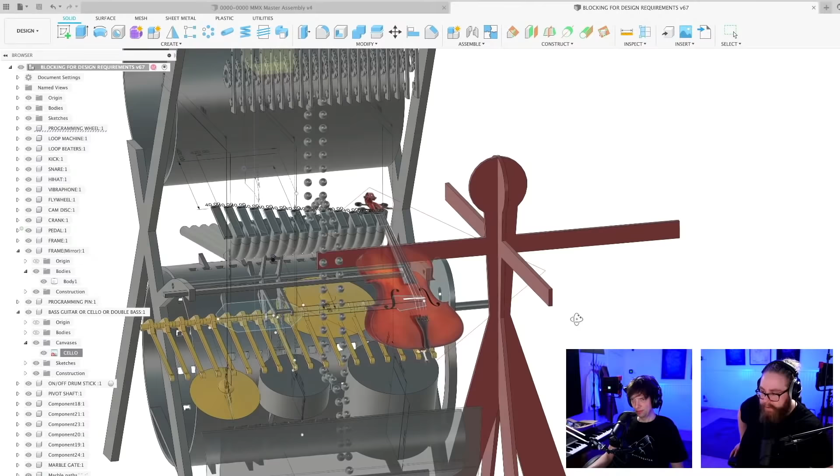Make the neck of the bass point out towards the front of the machine. I guess the marbles fall on the strings, and then you can play outside of all the marbles dropping everywhere.

Wait, did you mean like you had it earlier, right in the middle of it all, where you had to reach your fingers in to play it? If you just have the base of the bass with the marble drop, and have the neck sticking out to the side, then you can reach it with your hands.

I'm going to try to duplicate this canvas. I've never done that. I want to have... it doesn't really allow me to do that. Let's edit it. So you mean like this, basically? Yeah, something like that. Well, what if this was easy?

It's so ugly and it's so practical. We can make it work somehow. Yeah, but this is... no. Function! Form follows function, take it or leave it. It's actually a super logical suggestion.

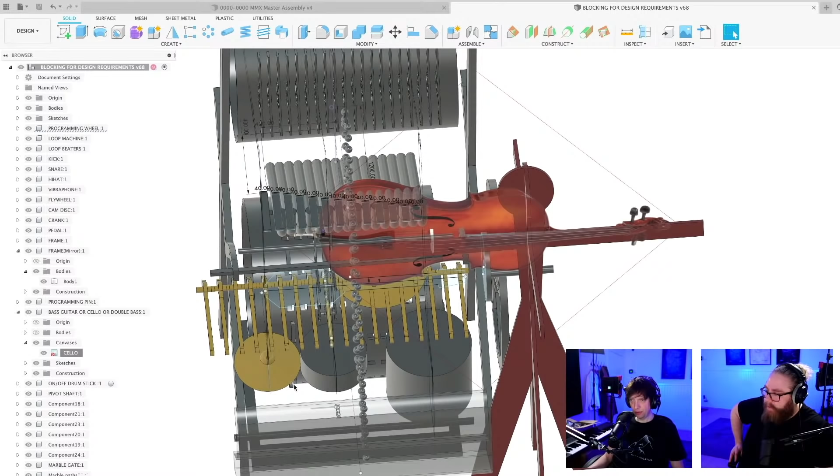But I'm thinking a little bit about these drums. I think they've been allowed to take a lot of space right now. We should be able to put a hi-hat next to them, kind of in between. It feels like they're taking more space than they really should, so I'm going to try to move the drums a little bit to the left.

Edit feature, so I move the snare here. More. Maybe there. And the kick should follow - I should have programmed this by now, so they actually follow each other.

And then the hi-hat in between. There. And then a little bit higher. Remove this function and I'll do 20 centimeters higher. So I grabbed the wrong line.

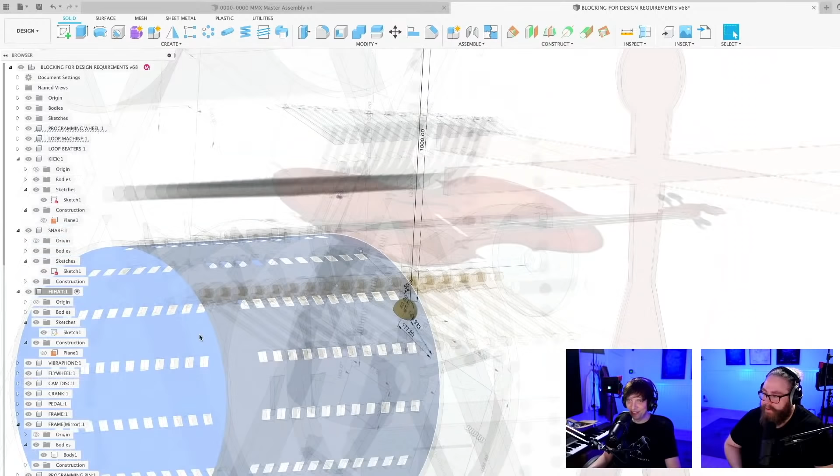I went to see my friend the other day. She loves the golden buzzer in Sweden Talang. We were just watching YouTube, all the Swedish Talang who had received the golden buzzer. Do you know what it is? What is Swedish Talang? I also didn't know. It's like a talent show, in front of a jury - Sweden's Got Talent. And sometimes when a judge falls in love with a performer, they press the golden buzzer, which means the performance goes straight to the final, no one else has to agree. You only need one to give you the golden buzzer. And it looked like that thing the hi-hat became. And everyone is crying - now that's good entertainment.

So I'm already abandoning some better design principles, but you can see now that all of a sudden we have a little bit more space. I didn't think I would fight so much for space as we're doing right now.

The only thing to do about that is redesign the whole frame and everything, and not have stuff so crammed into each other. I think about the idea of having instruments spread out more on the machine, I guess.

What's happening here? Yes, now my point is that when the drums are moved, we can go back to this direction and the bass can fit here. I think I made it a little bit bigger than what it is.

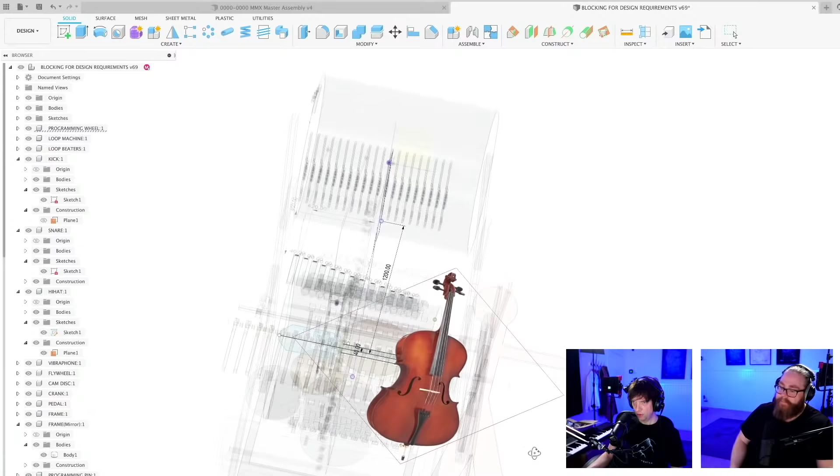This to me feels like a natural place, right? Yeah, but it's inside of the programming wheel, it's not like on the side.

I mean, if we could get it down maybe to the height of the drums - really comfortable to be playing it. Yeah, but then the drums can move up as well. I'm just going to lower it a little bit.

Bass guitar - is it this one? 800? Yes.

And I'm going to make fewer of these beaters. It's not that pattern, it's this pattern. Edit this pattern, say 12 instead. Oh, look at that. I can hear it play right now.